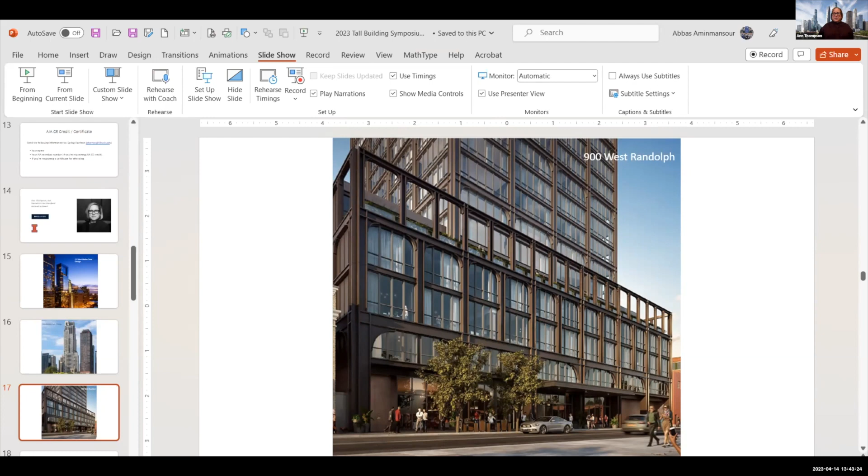Since no one is asking a question, I have a question for an experienced developer. How do you see the trend of modular housing and modular construction, the market, and the acceptance by developers? Because there has been so much technology and experience gained over the years, but it looks like modular housing still has not taken off in a big way to solve our housing problem, our homelessness problem. Everyone knows it is quick, simple, and fast, but I don't see any developers jumping onto this bandwagon.

No, we haven't. It is interesting. We have explored this a little bit, especially with our affordable housing portfolio, and we are very interested in modular housing.

At the quality level that we build, we have not found it yet to be economically feasible in most of our projects. When you're building affordable housing, there are very strict requirements in terms of the quality of construction, dimensions that we have to meet. With those codes and requirements we need to follow, we have not yet found a modular product that we can build in a way that is actually cheaper than a stick-built product. So I think that is part of it.

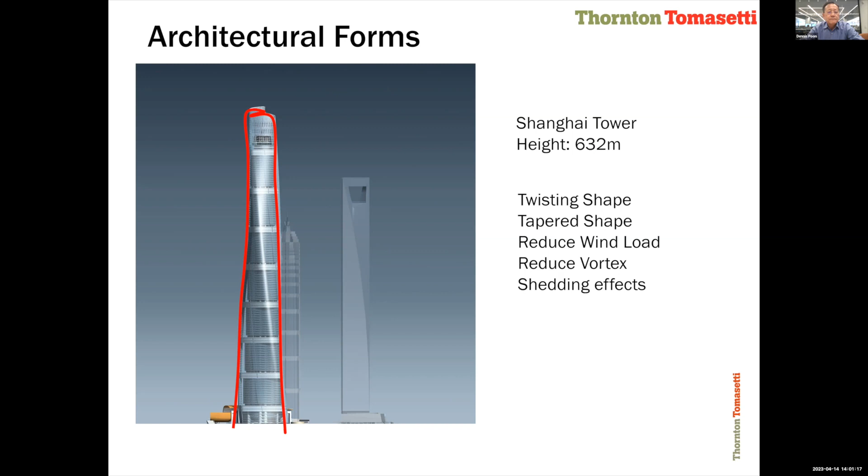We're also tapering it to reduce wind load, and creating notches on the side of the building to cut down the vortex shedding effect. So there are all kinds of engineering solutions, working with wind tunnel tests and with architects to create the best architectural forms and best engineering solutions.

Vortex shedding is one subject we all have to pay attention to when we design any low-rise or high-rise structure. Vortex shedding is a phenomenon where wind creates a spinning, turbulent flow of fluid. When you study fluid dynamics, it is an unsteady flow. When wind blows towards a building or object, it will go around the building.

When wind goes around the building and wraps around it, it creates a vortex, like a turbulence flow. This is a crosswind load. When wind goes on one side and to the other side of the building, it creates a negative and alternating low pressure zone that causes the building to move in a crosswind direction, oscillating the building.

It will create not only the drag wind effect, it will also create a crosswind effect. Now, for super tall buildings, when the building is very slender and the slenderness ratio is taller than 10 - slenderness ratio is defined as the height of the building divided by the width. If the aspect ratio is high, that means your building is very slender. The wider you are and the shorter you are, not slender. But the skinnier you are and the taller you are, it becomes slender.

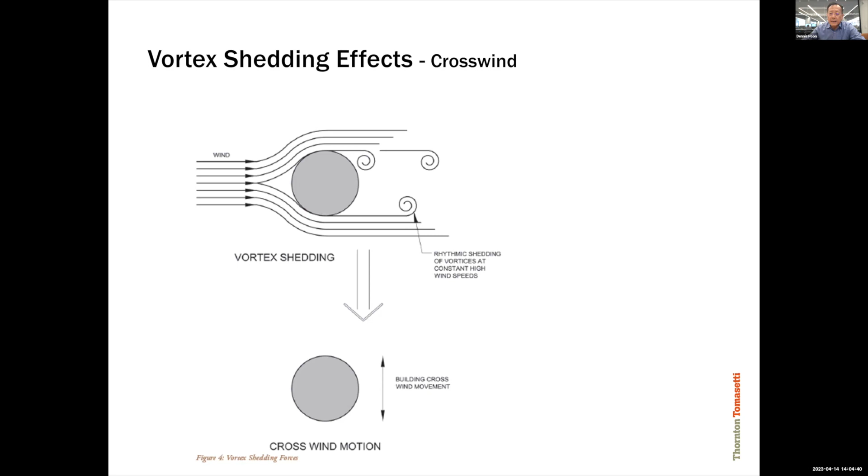So you see how the crosswind will cause the building to move in the other direction. How do we solve the problem?

When I started working on Taipei 101, we worked with C.Y. Lee architects in Taiwan and did wind tunnel tests. We did different wind tunnel tests on Taipei 101, and decided to change all corners of the building into staggered corners with recessed corners - we did corner setbacks.

On Ping An Tower, which is a 600-meter tall tower in a typhoon zone in Shenzhen, China, we also provided recessed corners in order to break up the vortex.

The reduction of wind load has a lot of benefits to your building, construction cost, and comfort level. If you reduce the wind load, you can make the tower core smaller, and therefore have smaller column sizes by reducing the wind load stress. Then if the core is smaller and the building member sizes are smaller, your building weight or mass is smaller. When your building's weight is smaller, you reduce the earthquake forces, because seismic forces are a function of the mass of the building.

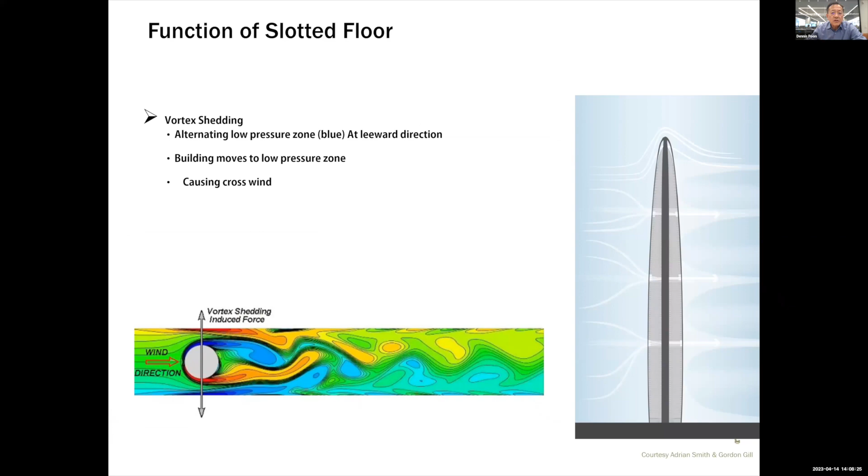So we went through a wind tunnel test with our ally, our colleague RWDI in Canada, and we ran different wind tunnel tests to find the optimum solution. This shows some of the effects, how you can see the vortex shedding and the induced vortex shedding effect. You cannot cheat.

So after that, we tried to work with the architect on how to create a wind slot and optimize the architectural form without any negative effect. So the end result is a more efficient structure, a cost-effective building, and it works.

Now, another phenomenon when we deal with high-rise buildings is the issue of acceleration. Everyone knows all buildings will deflect and move due to wind, or move in different directions. It is not the movement and the amount of deflection that people will feel. People will feel the motion, the building motion, due to high acceleration of the movement.

The large deflection of the building will have a bad effect on the building finishes - your door frames, your partition walls, your curtain wall finishes. Curtain walls will crack or pop if you have excessive deflection. And if you deflect too much, you introduce a lot of stress and strain to your building members. That's no good. However, for the occupants of any tower, the acceleration is the perception that makes you comfortable or not comfortable. People will feel the building movement if you have excessive acceleration.

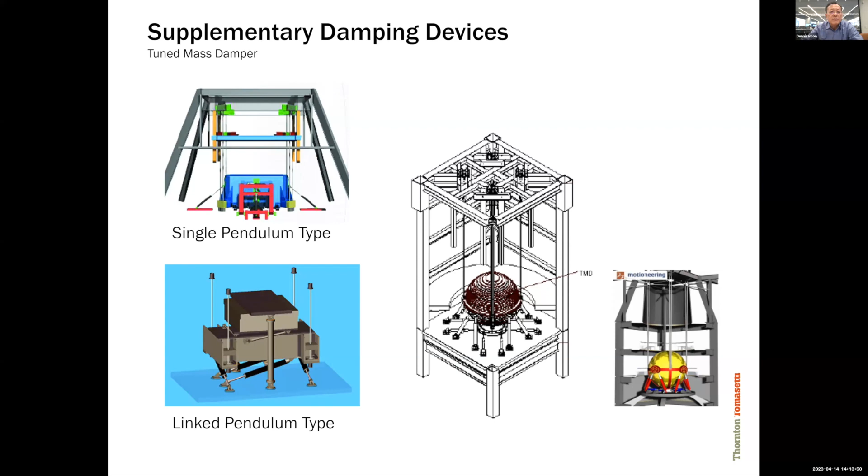This is one of the pendulums we used in Taipei 101. We created a steel ball painted gold, about 3 stories tall, and opened up the space as a sky restaurant and sky observation tower. This became a tourist attraction.

This damper did move during earthquakes and high wind, and it became an attraction. When people see it moving very slowly, they feel more comfortable because they know the engineering works in this high-rise building, and it also functions somewhat during an earthquake.

The other one is Shanghai Tower. The gray color you see at the bottom, hung by cable, is several hundred tons of steel plates, and the designer put a sculpture on top to make it like a tourist attraction at the top of the building.

So TMD is a very good device, and sometimes on residential buildings, when you don't need that much damping, we use a water tank with control hoses on it, making it like a tuned liquid column damper.

When the building sloshes, the water gets activated and sloshes around through different valves and openings, and gates inside the water tank. We control the water flow to counteract the building motion.

Another one uses viscoelastic material, which we put in a link beam between concrete shear walls. You have two concrete shear walls, usually in the elevator lobby, connected by a link beam. When the building moves, it activates this concrete link beam, so we put viscoelastic material to absorb this movement and the energy, creating a damping effect.

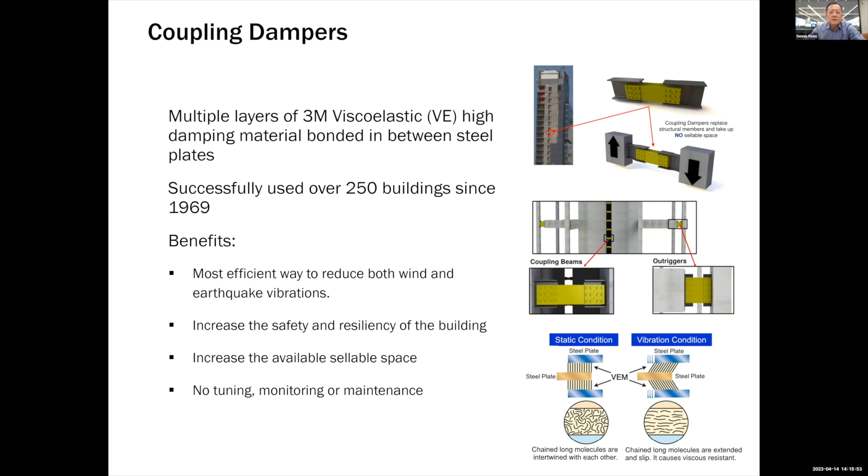The other one is like a viscous damper, working like a shock absorber. Sometimes we can put it at the end of the outrigger. When the outrigger connects to the column and moves, we can absorb some of the energy. So in addition to managing the mass, stiffness, and frequency of the building, there are supplemental dampers, which are a much cheaper way to do it.

There's another one developed in-house by Thornton Tomasetti with RWDI, called the hummingbird kinetic damper, because water sloshing dampers and water tank dampers are too heavy and use a lot of space.

We use a series of air pipes connected to a series of water tubes, using air spring control through valves to accurately control how the water moves inside the tubes. This is a very effective way to mobilize the whole volume of water inside the tube instead of sloshing dampers. We can put these tubes below the mechanical room, hung below it, or on the side of the building—it's very flexible. This is another effective way to use dampers to manage acceleration and save cost on the tower.

Now, another tool we have for high-rise buildings is our TT Core group, continuously creating software development and computational modeling, research and development. As we continue to push the envelope in engineering innovation and optimize design, we need new technology with new software development, and our TT Core Studio is continuously working on that.

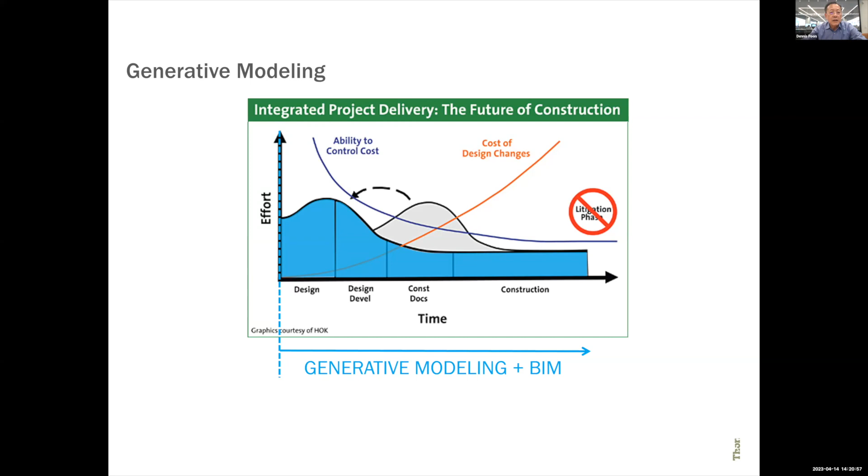So when we do parametric modeling, we have to work with the architects hand in hand. We have advanced software - everyone has been using Rhino, Grasshopper, and so on. We also have our TT in-house core studio, specific software developed that will enhance it, giving full parametric modeling.

This is a design competition from years ago in Asia, and the architecture had this kind of rendering. So if you have all this exterior curtain wall, how do we cope with that? We went through parametric modeling to see how we can provide our primary structure and adapt the primary architecture's exterior into our structure.

So through a series of parametric modeling, we optimize our structure, system, and form at the very beginning, and then give it back to the architects and work with them in order to have the optimum design from early on. Whether it's a composite structure or steel structure, it's the same - we have to work out the structural system primarily first.

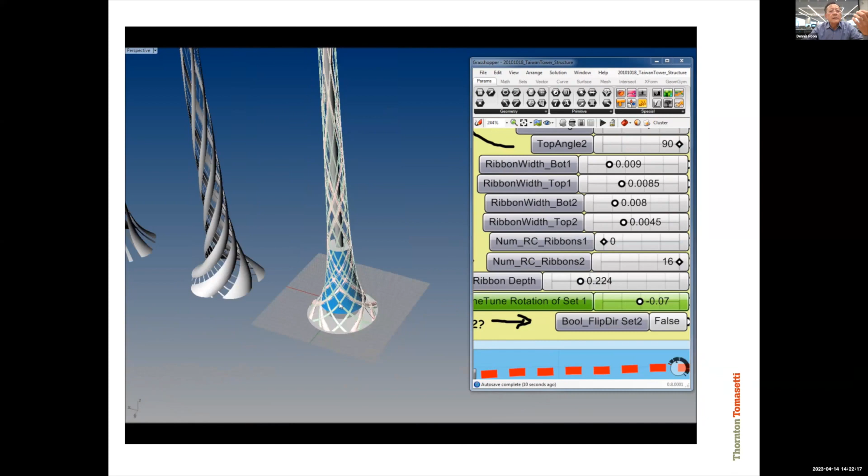So you can see the ribbon, the chaotic or random design - this will lead us, at the end, to create a very rational exterior diagonal bracing system that will fit into the architecture and hide the structure within the curtain wall of the architect. So this is one of the examples.

I have more slides on other jobs, but I know I don't have time. Another subject for our high-rise building design will be performance-based design. As we know, we are dealing with earthquakes everywhere now in most countries, especially in Asia and developed countries - they have a lot of seismic design.

So our old style of linear earthquake design, linear analysis, is no longer accurate. So we started performance-based design very early on, more than 20 years ago. We are already working on performance-based design at different levels based on the capacity and the computer software we have. So performance-based design is a must, an important subject for high-rise building design.

And that's why we have to take our advanced dynamic analysis classes. It is very important to know dynamic design and nonlinear analysis. We are using time history analysis. We have to understand what seismic level we design for, know the material we are using, and consider the deformation base - and it is always a nonlinear analysis.

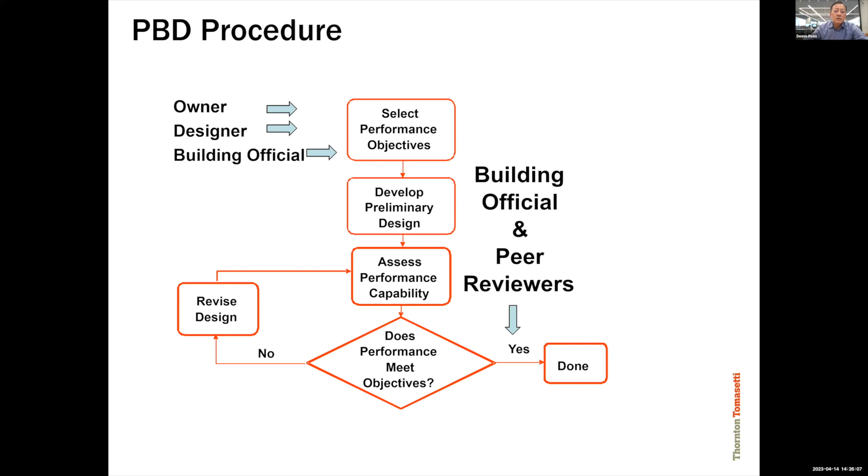So we talk to the owner about what performance target we will be using for the building, and this is a discussion with the owner based on performance target. After the owner and designer agree on the selected performance objective, we develop our design criteria and continue on this performance-based design.

We create a mathematical model for the tower structure. We do inelastic material property analysis with steel, concrete, and concrete in tension, and study that. So we have to select the proper seismic curves.

On this job, we study the different curves in San Francisco, different curves in different parts of the world, look at the time history curve and try to calibrate it in a way that is useful, and we scale it up and down to the level that can be used on our specific project site, because we have to do site-specific seismic evaluation, not just by the building code on high-rise building design. We do site-specific seismic evaluation and analysis and choose the right seismic acceleration curve, time history curve to use.

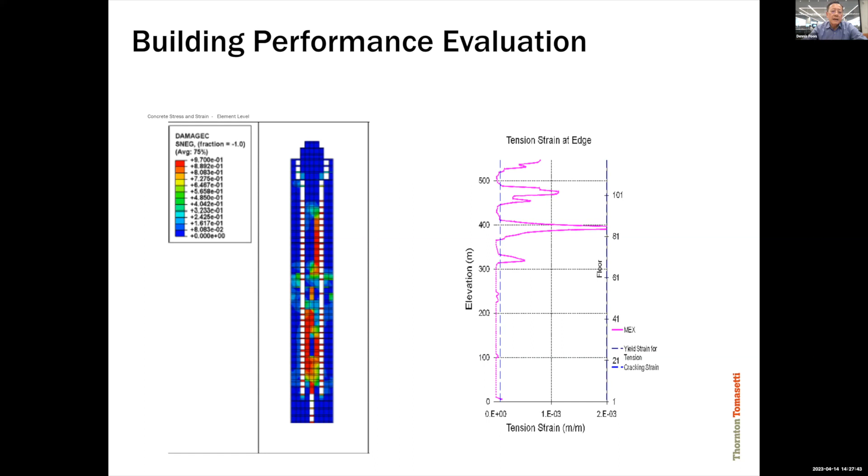So after that, we check the performance of all the beams and the shear walls. You can see the hotspots we have in our shear wall, in our link beam area, with nonlinear dynamic seismic analysis. You can identify through visualization, go to this area, and see how to improve it, how to design it properly. So it is a lot more accurate to provide performance-based design for high-rise buildings. The old days of linear analysis are long gone.

Now, another thing in our industry is 3D printing. I'm quite interested because I always look into the forthcoming trends in our industry. We cannot get away from 3D printing. 3D printing is already here, but for buildings, we can already do a lot of 3D printing with small bridges, maybe a lot of building units.

I participated with AI SpaceFactory on the MARSHA 3D printing project. We basically provided a special material to do the printing, and participated with NASA. So you all will have the opportunity to participate in upcoming opportunities for 3D printing in our industry, from small houses to mid-rise buildings, maybe even to high-rise towers in different ways.

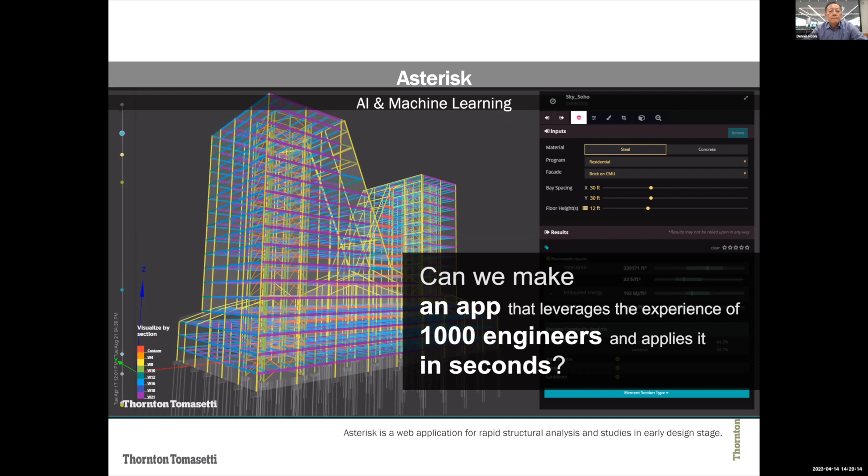So machine learning is also part of our daily lives right now. We always have to accommodate AI and machine learning. Our company has been so committed to it, and we have a lot of database in our AI that will help us advance our design and optimize our design. We have software we developed and how we work with all our clients to optimize it.

So sometimes size and talent matters, and I'm lucky with our founder Thornton Tomasetti's group, and everyone has been able to stay on the forefront of technology. I encourage all of us to stay on the forefront. That's how I have the opportunity to work with my team on so many challenging projects, because we have the tools and the experience to do it.

Now, I have 4 or 5 towers I could talk about, but I picked just one of them because time is running out: Wuhan Tower, Greenland, in Wuhan. Everyone knows Wuhan after COVID, but that is still a very controversial subject where it happens - we're not going to go into it. I was in Wuhan many times, and so far so good. I came back okay.

This landmark building in Wuhan is designed by Adrian Smith, with us as the structural engineer, working with local engineering firm ECADI. It was supposed to be 636 meters tall, but after we designed the building and construction reached almost 75% of the way up, the government said you cannot build 636 meters - you have to cut it down to about 500 meters. So we lowered the crown after that, but this building is finished. It's still close to 100 stories. This is the building where we utilized all the tools I've discussed - how to cheat the wind, how to make the building taper, how to do the wind slot and acceleration control, and all the high tech we're talking about.

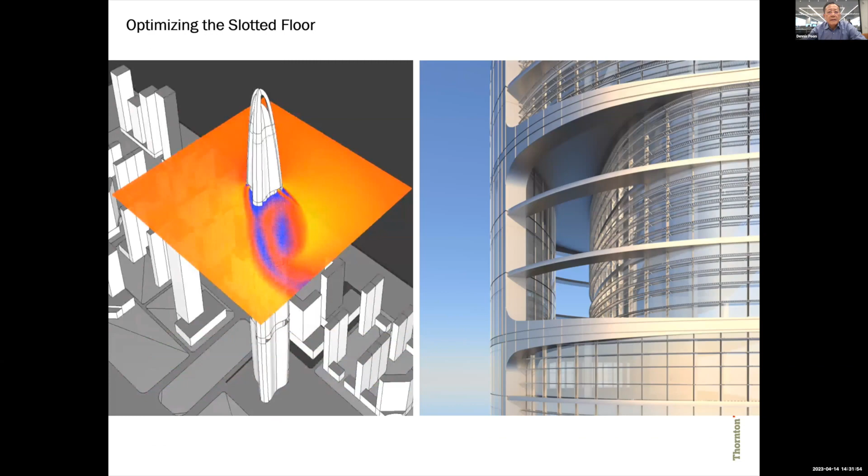Actually, we are. So anyway, I think I can just go through this very quickly, and you can see the aerodynamics, and then again, I want to show one more slide that is important for the framing.

So you see, this is the core. We try to use a composite concrete core with steel buried inside, and also provide the perimeter column. We try to use the full width of the building by using outrigger trusses, connecting the core with the outside column, increasing the stability of the building to make the high-rise stable.

So this is the composite concrete core, the perimeter super column for the tower, and this is the extensive use of outrigger trusses on the mechanical floor, the beam system.

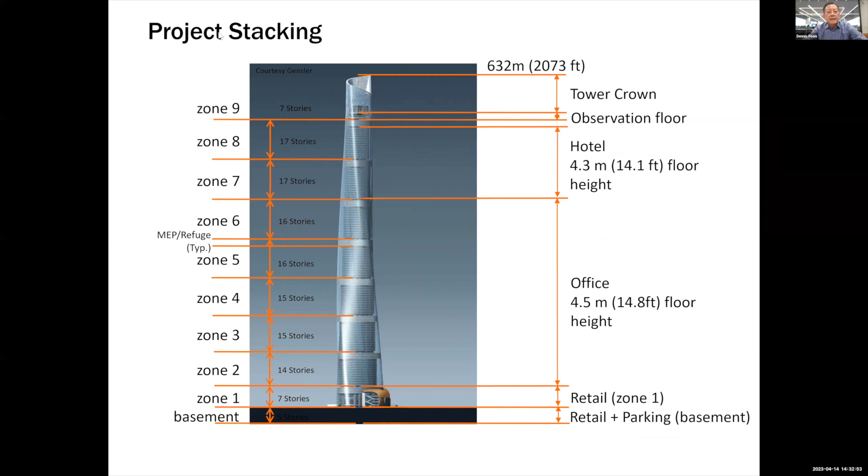So anyway, next time we can talk to you more about different buildings, Shanghai Tower, and so on. I want to conclude this way. You see, even with the shear wall, sometimes we use steel plates inside the shear wall so that we can reduce the congestion of the rebars and also take higher strength steel. This is some of the Shanghai Tower.

Since we don't have time, we will leave it for the next opportunity when we meet again. There are many interesting projects we can discuss. Hopefully I can make you guys more interested in new technology and keep exploring another new frontier. We have many good colleagues driving this, but as I said in the beginning, I really want to see how we can use our experience to push forward and build more housing for the public, not just beautiful buildings, but buildings used by the general mass, because housing is a worldwide problem with population growth. Hopefully we will pay more attention to it.

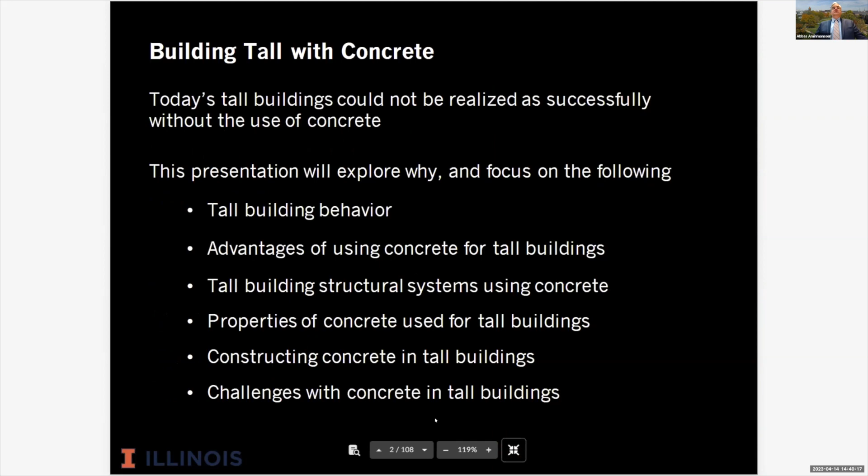So today's tall buildings really couldn't be realized as successfully without the use of concrete. We're going to explore why through tall building behavior, advantages of using concrete, tall building systems that use concrete, the properties of the concrete we use, how we construct our buildings in concrete, and then some of the challenges we see.

So first, some overview on tall buildings. Tall buildings are becoming more and more common, and so are taller tall buildings. Dennis alluded to all the slender tall buildings. CTBUH classifies super tall buildings as those greater than 300 meters and mega tall being greater than 600. And here's Dennis's mega tall building.

So one of the— oops. I don't think this is the slideshow. This is an active... No. Anyway, sorry for the technical difficulties here.

Currently we have 4 megatall buildings and 211 super talls. Under construction, there's a lot more. Proposed, there's even more. And it's fascinating to look back just a little over 20 years ago when we had no megatalls and only 26 super talls.

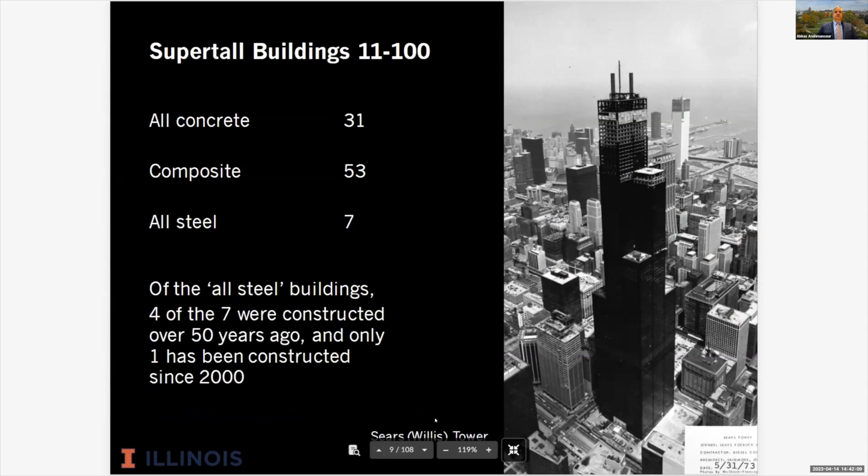Looking closer at the top 10 tallest buildings currently, 2 of the top 3 are all concrete—now they do use structural steel to create the spire, but they're essentially concrete systems. We've got 7 that are composite systems where concrete core walls are used with composite columns, and then we've got Taipei 101, which has composite as well. Looking at the rest of the 100, we see 31 all concrete, 53 composite systems, and only 7 that are all steel. And of those 7 all steel buildings, 4 were constructed 50 years ago or longer; only 1 has been constructed since 2000.

So why do so many super tall buildings use concrete? There have been continued advances in concrete material, as well as how to construct concrete in an efficient manner. Additionally, concrete has many inherent advantages that complement tall building behavior and design: it provides greater stiffness to reduce drifts, greater mass to slow down motions, enhanced strength opportunities, and the thinnest floor plate to optimize building height.

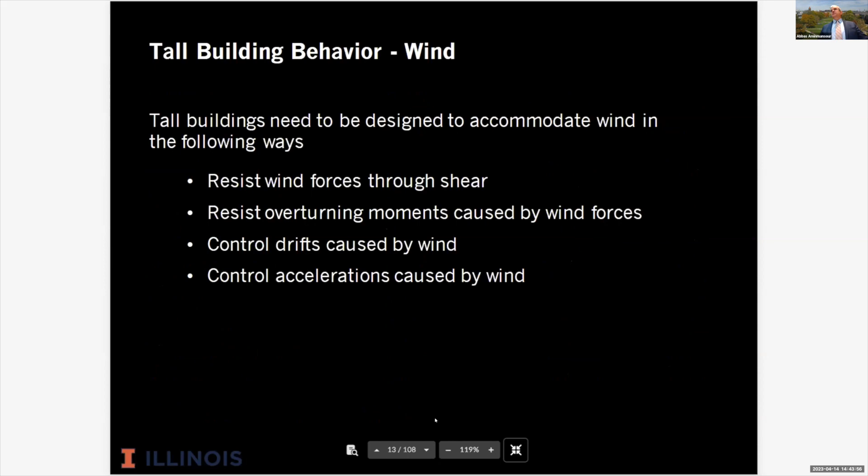Slender buildings have different responses and requirements to the wind. In tall buildings, all tall buildings need to be designed to accommodate wind, resisting wind forces through shear, resisting overturning moments caused by wind forces, controlling the drifts, the motions due to wind, and also the accelerations.

First, I want to talk about how wind hits buildings as a shear load. When we have a large concrete core, it's very efficient in resisting that shear. We can also utilize the building's perimeter to reduce shear, although most of it's still going to be taken by the concrete core.

Wind also creates an overturning moment onto buildings. So we'll have a wind load that hits a building. It gets resisted ultimately at the base, but it creates this overturning moment, and that overturning moment gets resolved into a force couple that can potentially create uplift or tension on a structure.

That overturning moment, no matter how big your structural footprint is, is the same magnitude. So increasing your structural footprint increases your moment arm, decreasing that couple. Diagrammatically, if we only have a core versus a building where we've expanded and engaged the perimeter, our moment arm, our structural footprint, is much bigger, so we can reduce the force couple.

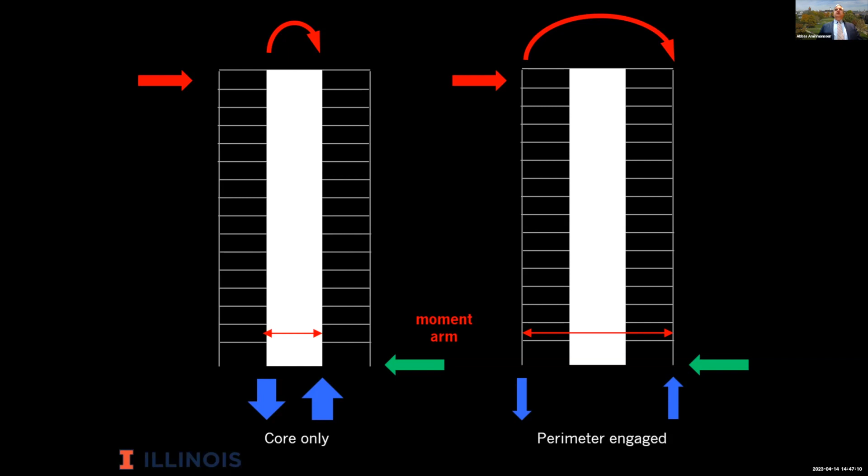Engaging the perimeter not only allows us to reduce the uplift, it also allows us to increase our building stiffness, because we're reaching out and grabbing all of that material that's as far away from the center of the building as possible. Doing this in concrete can really increase this stiffness.

Let's take a look at an example. We have a representative tall building with a central core wall system, and we calculate the building stiffness by calculating its moment of inertia. Now if we consider engaging the perimeter columns, let's say we have 3x3 concrete columns.

We can calculate the moment of inertia of those concrete columns as 240,000. That's because the important component of calculating moment of inertia, or stiffness, is the distance away from the neutral axis that material rests. So if we add the column stiffness, we wind up increasing our overall building stiffness by almost 4 times.

Now if we look at the study using steel, we went with a W14x873, which is one of the largest available steel sections. It winds up basically giving us about the same performance as the concrete column. But what happens if you combine the two together?

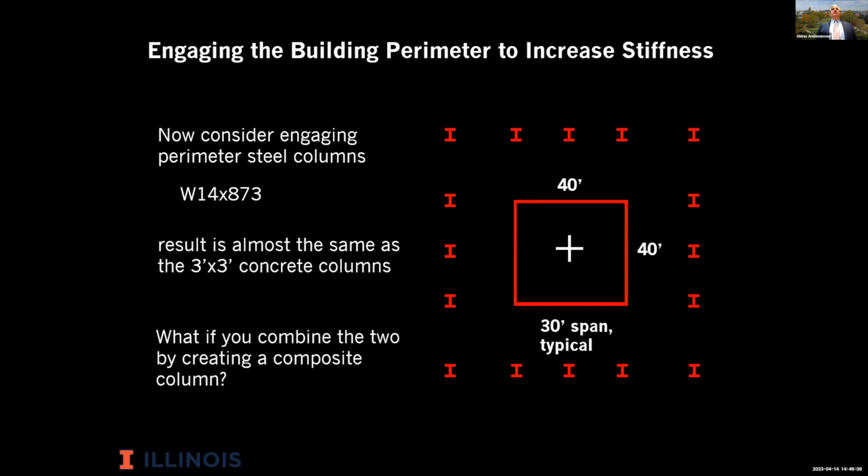You combine the two together either by a circular CFT, concrete-filled tube, or by placing a steel section within a concrete element. This winds up taking advantage of both the concrete and the steel, further increasing your stiffness. Not only does it increase your stiffness, it increases your strength as well.

This is a very common solution when you have a steel floor framing system, because now you can use the steel within the perimeter columns to connect your floor framing. The steel also helps reduce the issue of shortening in concrete, which we'll talk about a little bit later.

As Dennis started to get into accelerations, increasing your stiffness does help to control drift and accelerations, but sometimes you need more than just stiffness to control accelerations. Tall buildings, but especially the slender tall buildings we've been talking about, are susceptible to these increased accelerations.

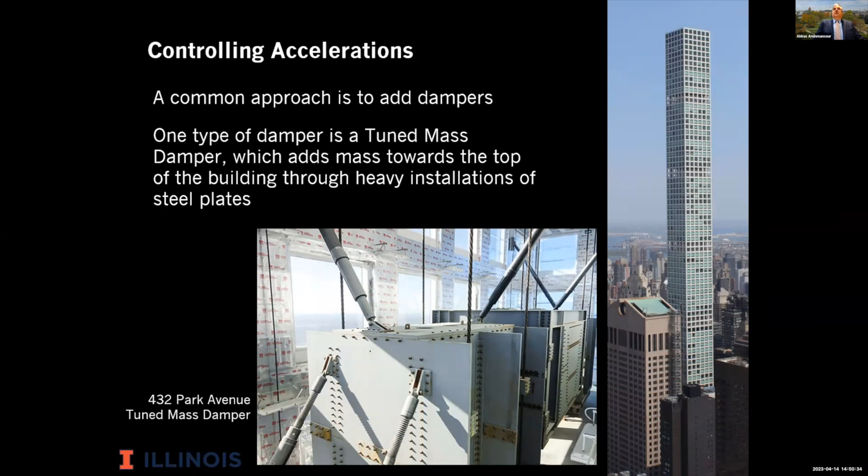One of the ways we can make buildings more comfortable from accelerations is to add mass, because mass will essentially slow down the building's motions. One way we can slow down the building's motions and add mass is to add dampers, the tuned mass dampers that Dennis was talking about for Taipei 101. Here's the one at 432 Park Avenue. Now, this is a very slender building.

Another approach to adding mass is to start with a concrete system, because concrete's weight automatically adds mass to the building. Now, this isn't just saying add more concrete, we still want to make an efficient concrete design, but just using concrete by itself adds more mass. This is beneficial, though it might not be enough, as seen again at 432 Park Avenue, a concrete system that still needs some supplemental damping, but at least it's an assistance.

Building tall also requires a lot of resources, both materials and economic resources. So optimizing a building's height can really help to optimize the building's performance from a material and financial standpoint, because less height means less resources used for the same area. And considering the same area, less height means less wind loading.

Concrete can provide the thinnest floor system. If we look at a typical ceiling sandwich, and this happens to be one with a steel frame system, we see that the ceiling sandwich is dominated by the structure. And since this is a frame structure, it takes up a greater percentage. So if we can optimize the structural portion of this, we can then optimize a building's height.

Considering concrete, a concrete flat plate system is the thinnest system you can build for tall buildings. This is a continuous thickness flat slab that can efficiently span up to 30 feet. We can get more if we post-tension it. Frame systems you can span longer, but now you have the additional depth like we saw in the ceiling sandwich. So this isn't an option for all tall buildings, but it is an option to consider for multiple usages. It's not just for residential and hotel — we can do office with this as well.

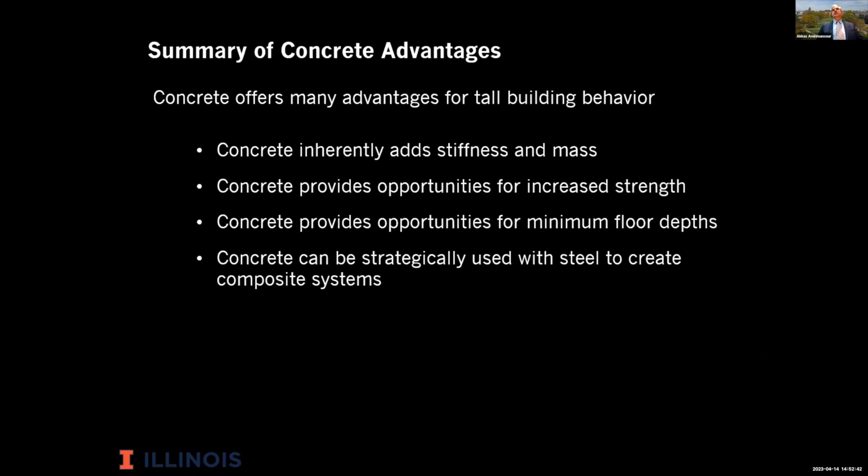So in summary, concrete offers many advantages for tall building behavior because it inherently adds stiffness and mass. It provides opportunities for increased strength, opportunities for minimum floor depth, and the concrete can be strategically used with steel to create composite systems.

But there are other advantages. Concrete slabs have acoustic properties that make concrete floor systems a preferred choice for residential and hotel applications. It also has inherent fire resistance characteristics. And concrete construction can also be fast, especially if it's tuned to the needs of the formwork systems and the construction sequence requirements.

I just wanted to go through the lateral systems which take advantage of concrete. First is a core only, where the lateral system is only the core — all the shear, all the overturning moment, all the stiffness is derived from that core. Now there are some limitations here because that core can only be so wide, so your footprint's only so wide.

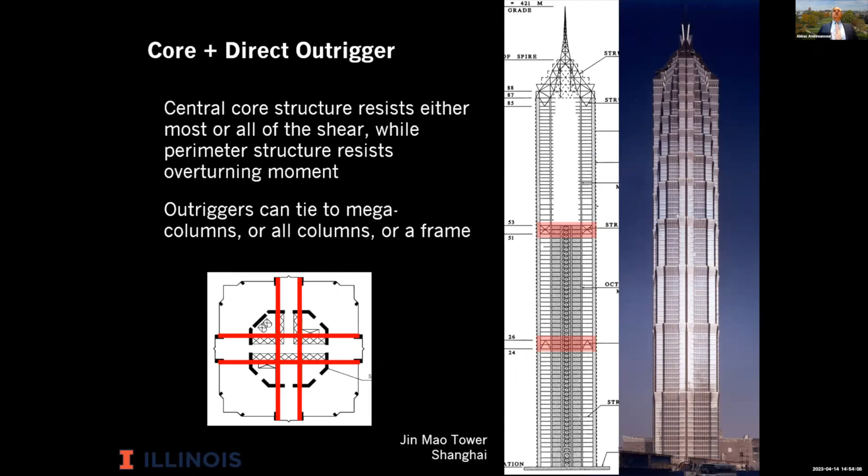So because that's limiting just to have the core, the next step is to engage the perimeter. We do this first with a direct outrigger, where we have walls or trusses that rigidly tie the core to the perimeter. It increases our building stiffness because now we've engaged the perimeter, and it also reduces our uplift. The central core in an outrigger scheme really still resists most or all of the shear, while that perimeter structure assists in resisting the overturning. These outriggers can connect to a mega column like we see here at Jin Mao, or they can connect to all the columns, or they can connect to a building frame.

An example of a system where all of the columns are individually tied with a direct outrigger is Burj Khalifa. Burj Khalifa is also a buttress core system, as we'll discuss in a minute, but it's also a direct outrigger system. You can see here on the outrigger floor, we provided double story height walls to rigidly tie every column to the interior core wall system.

So you can still get the same effects with an outrigger system by using what we call an indirect or virtual outrigger instead of a direct tie. The way these systems work is you have a belt wall that engages all of the perimeter columns and a thick concrete slab on the top and bottom of the belt wall. So you're creating a shear box — you don't actually have any internal rigid ties. This is similar to an outrigger in that you're really resisting the motion of the building and you're engaging the perimeter. It's not as effective as a direct outrigger, but it can be very effective.

In fact, one of the buildings I led the efforts on in Moscow — this was Europe's tallest building when it opened, a 10-to-1 slenderness ratio — was Oko Tower, all residential. We have four belt wall zones on this building to create the indirect outrigger.

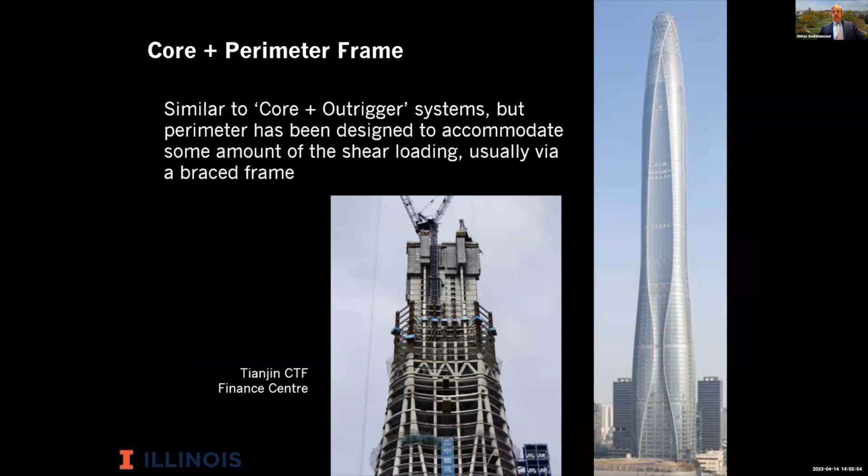With core and outrigger systems, you can also connect to a frame, such as what's shown here in Tianjin CTF Finance Center. This perimeter frame is designed to accommodate a certain percentage of the lateral loads through shear and also overturning, so it's designed in conjunction with that concrete core. Here with CTF, we used

concrete filled tube columns as well. Then we have a buttress core. The buttress core was developed for Burj Khalifa. It's a system that uses geometry to provide stability. We have 3 wings protruding from a central core, and it's inherently stable because each wing is always buttressed by the other 2. It also uses load to create stability because of the significant tapers - as the building approaches the ground, it keeps getting wider and wider in its structural footprint.

The last system I want to highlight is what I'm calling a core plus a cantilever. This is the same idea as a core-only building, except now we've expanded the footprint of the core to provide all the necessary stiffness we need for a building. The core carries all the gravity loads because we cantilever all of the floor plates off of the core. So now we've got a really efficient system in terms of resisting lateral loads and the overturning moment, because now we have all the gravity loads to resist that uplift.

A good example of this is the SOM design for Kingdom Tower that I worked on for quite a while. Kingdom Tower has that Thornton Tomasetti design that's somewhat similar, in that a lot of the floors are cantilevered off of the floor plates or off of the walls.

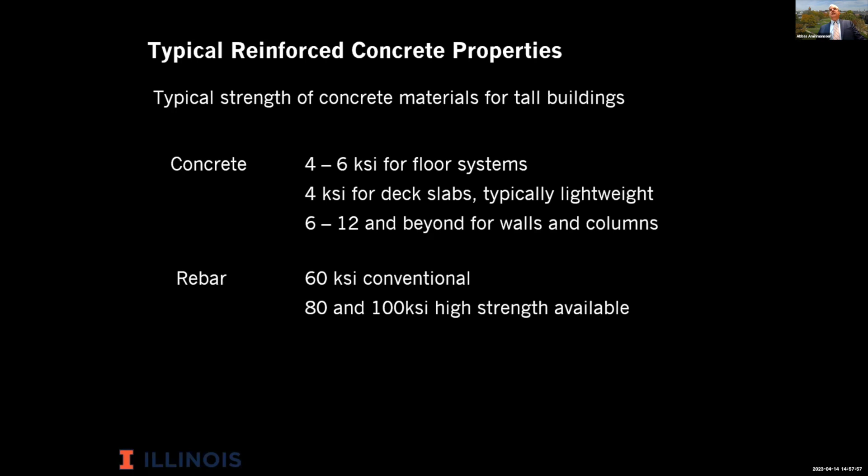So let's talk about the concrete we use for tall buildings. We use conventional concrete typically for the floor systems, high performance concrete typically for the superstructure, and self-consolidating concrete for the foundations and any congested elements. Typical strengths for floor systems are in the 4 to 6 KSI range. High performance starts at 6 and goes to 12 and beyond for the superstructure. For rebar, we use conventional 60 KSI - 80 KSI is very common - and 100 is available in certain situations as well.

Talking a little more about the concrete - typical concrete is a mixture of aggregate, sand, cement, admixtures, and water. One important metric to consider is the water-to-cement ratio. It can be as high as 0.5 for conventional concrete and as low as 0.3 for high performance concrete, because one of the ways of making concrete higher performance and higher strength is reducing that water.

Cement by itself, Portland cement, is an important part of concrete, but it's also one where replacing a portion of the cement can be very beneficial, because Portland cement by itself takes a lot of energy to produce. So it's beneficial to replace some of it with something that isn't so carbon intensive. Plus, Portland cement generates a lot of heat as it cures.

For high performance concrete, it's typical to have up to 50% replacement cements. When we use mass concrete - really thick concrete that can heat up even more - it's common to use up to 80%. Some common cement replacements are fly ash, ground granulated blast furnace slag, and silica fume. These are all byproducts of the coal and steel industry, but they all provide advantageous properties to the mix - they slow down the hydration reaction so the concrete doesn't heat up as much, they increase the flowability of the mix, and they also increase the uniform density of the mix.

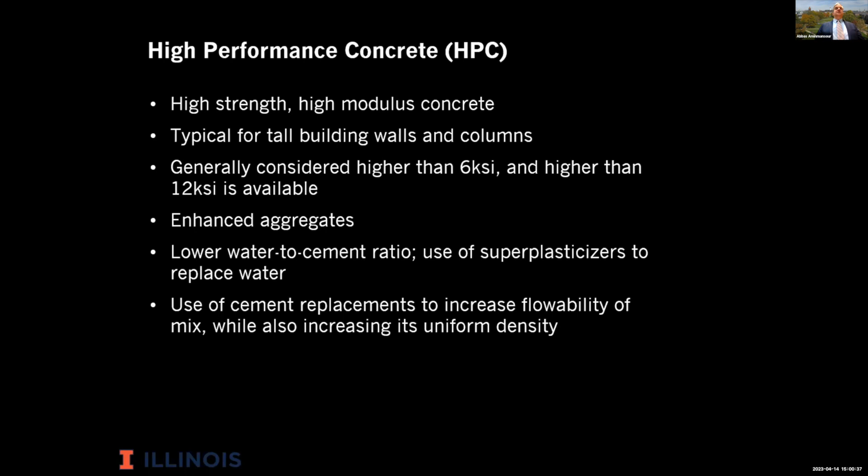For high performance concrete in tall building projects, it's common to not only specify a minimum strength like you do for all building projects, but a modulus that needs to be met as well. Additionally, there are other properties to understand: what are the creep and shrinkage characteristics? Is it a flowable mix because it needs to be pumped? How hot does it get, because the concrete elements are all generally large? And what is the durability or the finish?

I wanted to walk through an example of a project that uses high performance concrete. This is Merdeka 118, which will be the second tallest building in the world when it opens this year. It's just shy of 700 meters tall, mixed use, designed by Fender Katsalidis, Arup, and Samsung. This image shows where it stands next to number 1 and number 3, once it becomes number 2. It's a concrete system using a concrete core wall with 8 concrete mega columns, but it's also composite in that there's structural steel outrigger and belt trusses that engage these mega columns.

It does have a high strength, high modulus concrete. There's a rigorous testing program that Samsung went through with Arup to ensure the right concrete was used, meaning the right performance they were targeting. In fact, to ensure consistency in all their concrete, Samsung actually reserved a large part of the quarry where all the aggregates were coming from, to make sure they're always getting the same aggregates.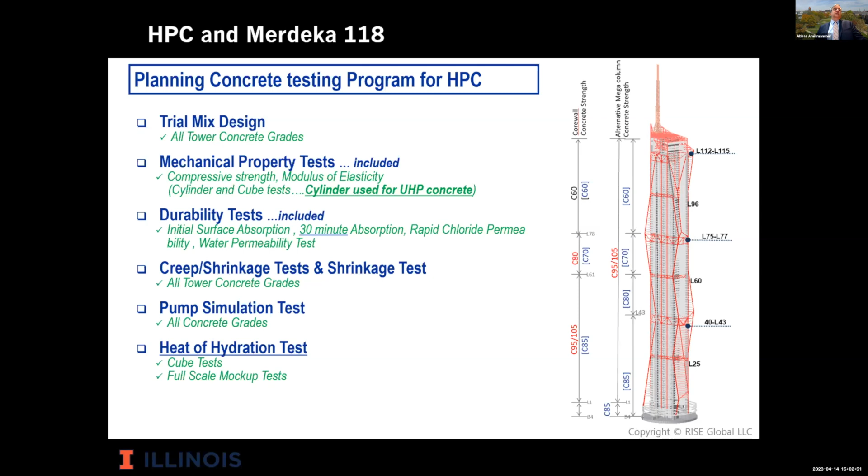The tests you go through on a building like this to ensure you have the right concrete performance: you do your trial mix designs to arrive at what the mix design should be, then tests to confirm your strength and modulus for that concrete. You do durability tests, and it's important to do creep and shrinkage tests so you understand those properties and can calculate how much the building's going to shorten. And you look at if it's pumpable, and how hot the mix gets.

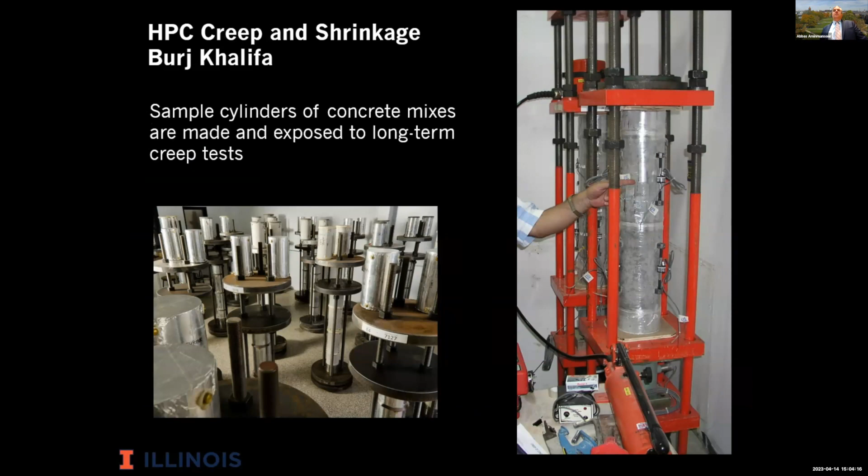They also did a large-scale test cube to evaluate the heat of concrete, particularly for the foundation mix. Then there was a number of creep and shrinkage tests done, where you develop cylinders of various different concrete mixes and put them through testing—this is a creep test shown on the screen—so you can evaluate the performance of that mix from a creep standpoint.

In terms of constructing concrete, one key metric is to minimize tower crane time, because the more you minimize use of the crane, the more that crane can be used for other things besides constructing the concrete. So you'll use formwork systems that don't need the crane, pump all the concrete to its point of delivery instead of using buckets, and prefabricate rebar as much as you can on the ground, because that's really the only thing the crane is used for in an optimized system. In other words, you design the structure to facilitate construction.

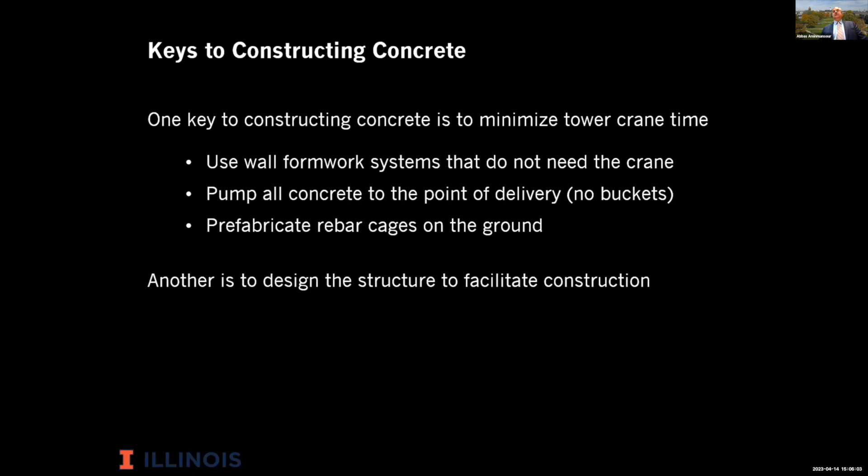You understand the requirements and limitations of the formwork systems, design and detail the reinforcement considering congestion and installation of those elements, and then design your system considering construction sequence.

When you're erecting a concrete tall building with a core, you can do it in two ways. You can do floor by floor, what's called stick built, or you can build it where the core advances beyond the floor by 10 to 15 stories. There's pros and cons to each. Most tall buildings are done with the core ahead, which enables a faster construction schedule. However, it does create some more complex detailing at the floor to core wall connection.

Now, if you have a steel floor framing system and you're advancing the core ahead, then you'll have either embedded plates within the core, or you'll have post-fixed plates that you tie that steel construction into.

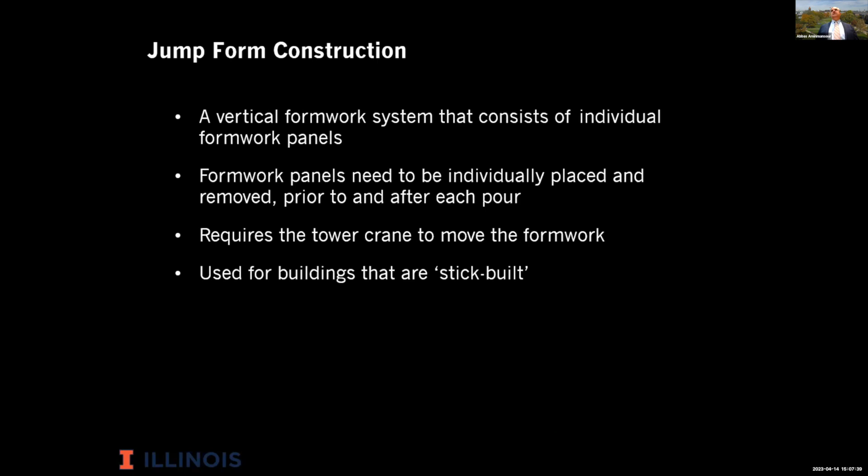Then you have slip form. Slip form is a vertical formwork where concrete is poured continuously into a continuously moving formwork. As the concrete is poured, the formwork is raised vertically at a speed that allows the concrete to harden before it is free from the formwork at the bottom. This can be a fast erection method. It doesn't need a crane, but it's not very flexible in terms of geometry because it's continuously moving.

A common system for tall buildings is the automatic self-climbing formwork system, because this really combines elements of jump forming and slip forming. Jump forming gives you the ability to modify on a floor by floor basis to some extent. Slip forming uses what you've just constructed to raise the formwork system without the use of a crane. Automatic self-climbing formwork allows you to do both—pouring on a floor by floor basis, but the formwork system is supported by the floor it just placed. A diagram here shows how this works.

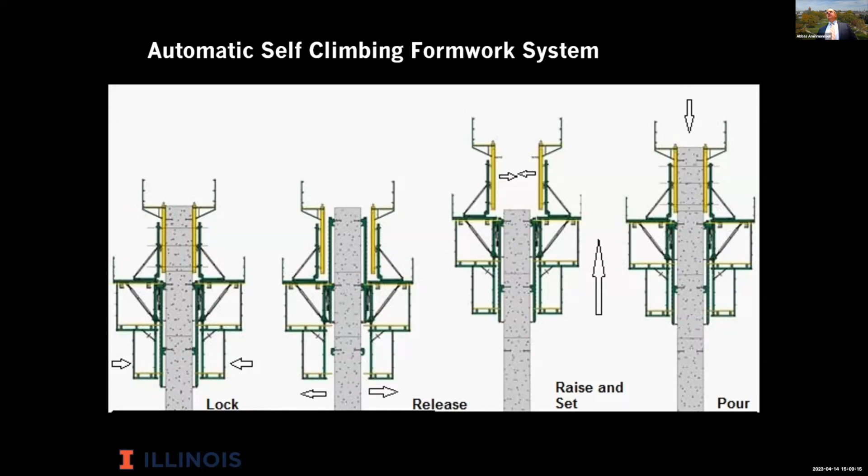You have a few different levels to the formwork system. At the top, you're placing the rebar and getting ready to pour the concrete, and then you have the floor immediately below it that the formwork system is actually connected to, and then it jacks itself up to the next floor. This is what was used on Burj Khalifa.

It really helped facilitate the construction, especially since most of the vertical elements on Burj were vertical walls. This is how the system is connected to the wall system. You've got a series of brackets that connect to the concrete that has just been placed, and the rails go through these brackets and connect to the formwork system and to the platforms around it for the workers. Through these brackets and rails, it can jack itself to the next level. Again, no crane time—that's the important key.

Column formwork tends to be modular systems where you use the same form many times for many column sizes. These need to be moved around by the crane unless you tie your columns into the wall system like we did at Burj. That being said, there were some columns at Burj that weren't part of the wall system, and these were just individual forms that went from floor to floor.

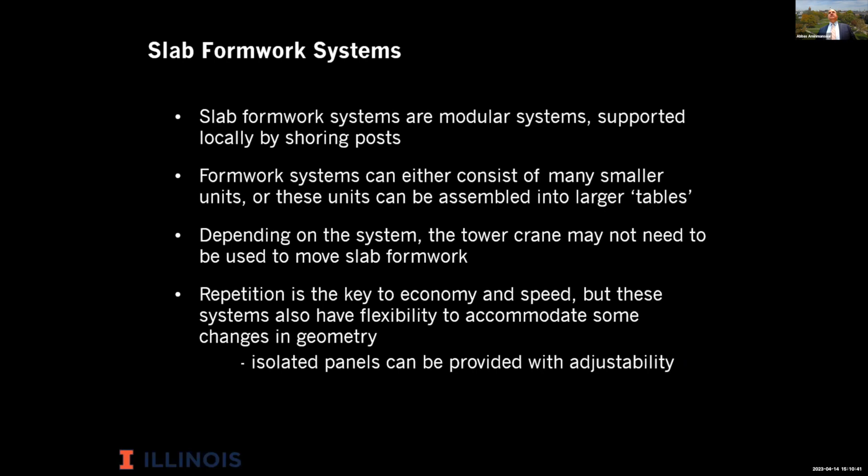One thing we need to consider with concrete floor systems is how do we shore these floors. They'll need to be shored until the concrete reaches an appropriate strength so you can release those forms. Typically when shoring these floors, you're going to go 2 to 3 stories below the floor you're pouring because you don't want to overstress the floor immediately below. You're trying to spread out the load as much as you can.

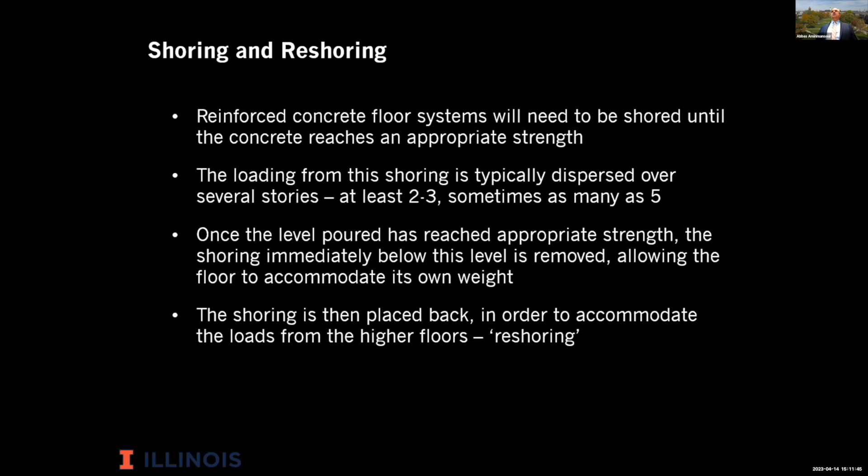And this is an example of the shoring that's typically done under a concrete system.

I just wanted to walk through how all this works with a building like Burj Khalifa. All of the vertical concrete, the wall concrete, was built with an automatic self-climbing formwork system. You've got the individual columns that are modular forms. What you can't see behind the protection for the workers are the slab forms, individual modular panels being used. And then you can see the shoring in place underneath those floors being constructed.

But no matter what formwork system you select, the concrete still needs to be provided. Typically you're not going to bucket, you're going to use a pumping system because of the speed of it. So how this works is you have concrete trucks that come to the site and deposit the concrete into a large series of pumps, and from these big pumps it's delivered to a concrete boom at the point of deposit.

One challenge with concrete is that if you have a high performance concrete that's a lot higher strength than your floor, you can't compromise the integrity of the column or the vertical concrete. So you will potentially bucket a higher strength concrete in and puddle it around the columns.

It's important if you're going to use these concrete delivery systems that you're able to pump it in one stage to the point of delivery. Burj had the world record at 606 meters for a single stage pump. That now has been surpassed by Merdeka.

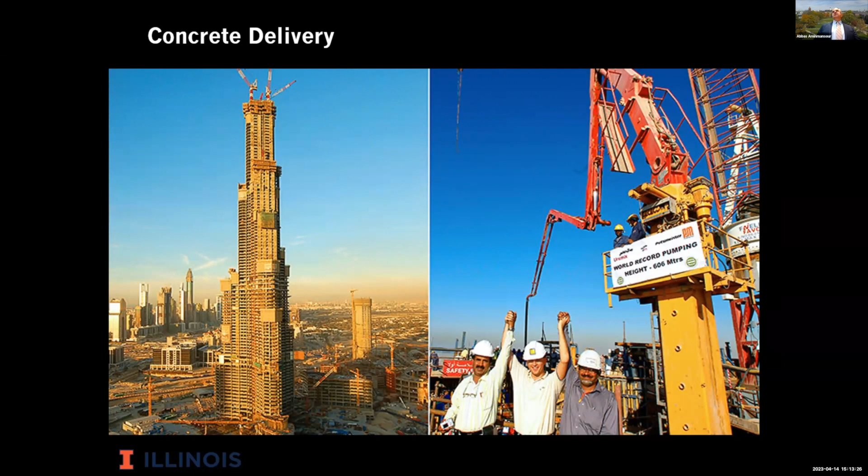Finally, I just want to quickly go through some of the challenges with concrete, particularly how we coordinate our building services and how we accommodate creep and shrinkage, and how do we actually correct our buildings during construction for dimensions.

In terms of coordination, concrete core walls are typically very thick elements and they're dense. You're not going to be able to core drill your penetration, so you really need to be able to coordinate all of the distribution and the penetrations in advance. Oftentimes, a lot of this needs to go through the door openings, which are the link beams.

This is an image of what not to do—there's just too many penetrations in the link beam. A better approach is to provide some penetrations, but also provide a zone underneath the structure to allow all the services to traverse.

But it's not only the link beams, we have to look at the walls too. When we look at going through the walls, we have to ask, are there other chases behind the walls that we need to avoid? So in some respects, it starts to become a Swiss watch.

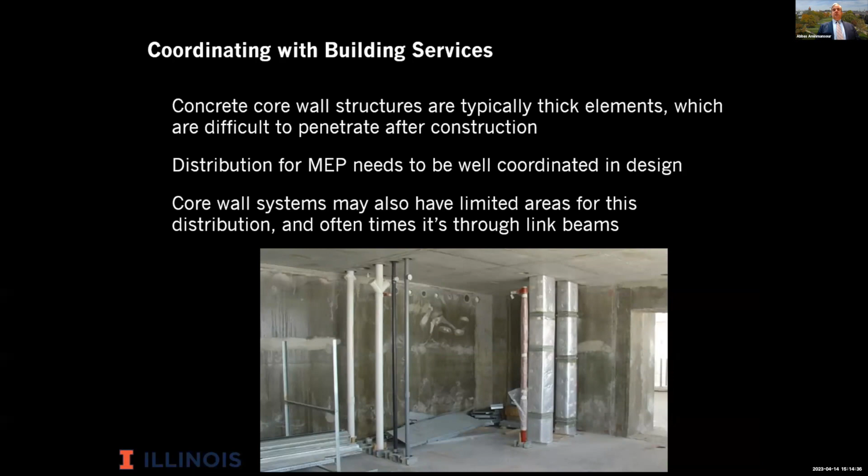Next is creep and shrinkage. As concrete ages, it continues to change its dimension, and this can add up over a period of time to a significant number. The shortening can get up to, like at Burj Khalifa, about 4 millimeters per floor. When you add that up, that's about 600 millimeters over the life of the building that Burj is going to shorten. That's something we need to consider—how is that going to be accommodated? And when I say the shortening, it's because of creep and shrinkage.

Creep is the nature of concrete shortening or compressing as it experiences sustained loading, so this is related to stress—the more stress you have, the more creep you're going to have. Shrinkage is about the shortening and changing of dimension due to concrete as it's drying and curing, so this is related to the volume to surface ratio—the more surface you have, the more shrinkage you get.

This is really an issue when you're comparing columns to walls, because you have completely different properties. Columns have higher stress than walls, and columns have different volume to surface ratios than walls. So you potentially have a difference between the two. There are a few solutions—you can try to design the columns and walls for similar stress.

That's tough to do because you just need a lot of area in your columns. One of the solutions is to make them more wall-like, like what we've done on Burj Khalifa. That also helps to keep the volume to surface ratio similar.

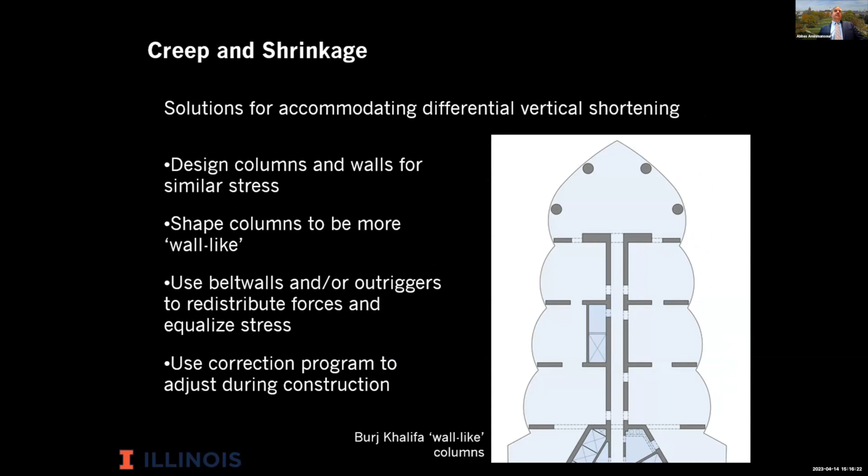But you can also use belt walls or outriggers to basically re-equalize the loads every time you encounter an outrigger or belt wall. You can also use a correction program to adjust the concrete dimensions during construction. And that's why I want to close with it, just talking about a correction program, because anytime you have a tall concrete building of sufficient height, you'll need to have a correction program during construction that corrects for height and also the planned location.

Because if you build a tall building to the theoretical wall floor to floor heights on a drawing, you will wind up with a shorter building at the end. So one approach is to design or construct each floor to the theoretical elevation, which means you're going to be overpouring your floor heights, or you actually build the floors up even more than theoretical elevation, assuming that you're going to have shortening that then basically self-corrects itself.

In order to really understand this, you'll need to do a creep and shrinkage analysis of the structure to understand the magnitude of what type of correction you need to perform. This creep and shrinkage analysis also considers the sequence of construction. And what we wind up getting is an understanding of what our wall shortening is going to be, what our column shortening is going to be, and then the really important metric, what the difference between the two are. With that information, we can put together a correction program that then the contractor can use.

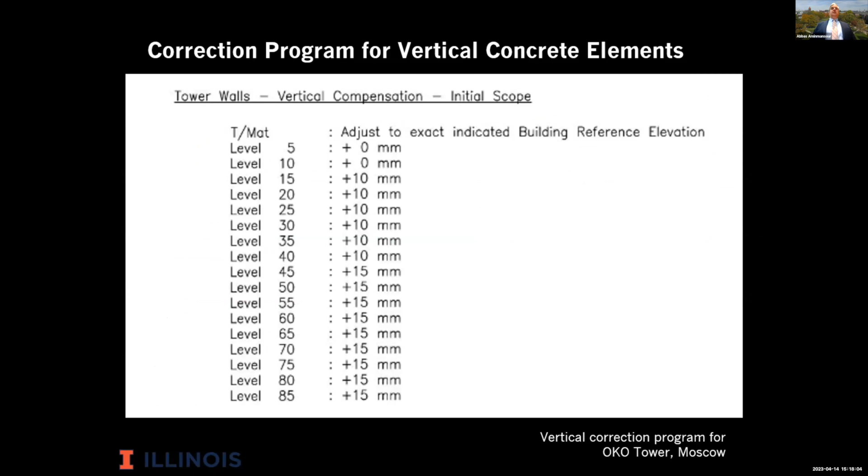Just to highlight one area of it, this is the wall correction. This is that OKO Tower in Moscow. We came up with a correction program where we overbuilt the floors, the higher that we got in the tower, so that ultimately the tower would be at the theoretical elevation once the shortening was considered.

So went through a lot of material. Thanks for your attention. Concrete, it's a great tall building material, but there's a lot that needs to be considered. A lot of advantages, but there's a lot that needs to be considered. So I guess with that.

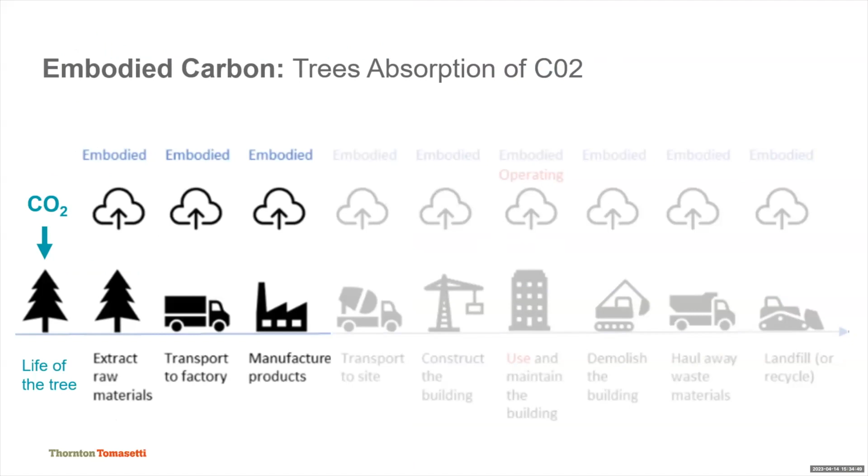I won't spend too much time on this, but there's this idea of embodied carbon and the life of the tree, where it's absorbing CO2 from our days in elementary to middle school science, and then the extraction, transportation, and manufacturing of this product.

A question I get a lot is whether it could really be sustainable or environmentally friendly if you're cutting down trees to do this. A couple things I've learned: as a frame of reference, it will only take 25 minutes to regrow the volume of wood used on Ascent, which is currently the world's tallest timber building.

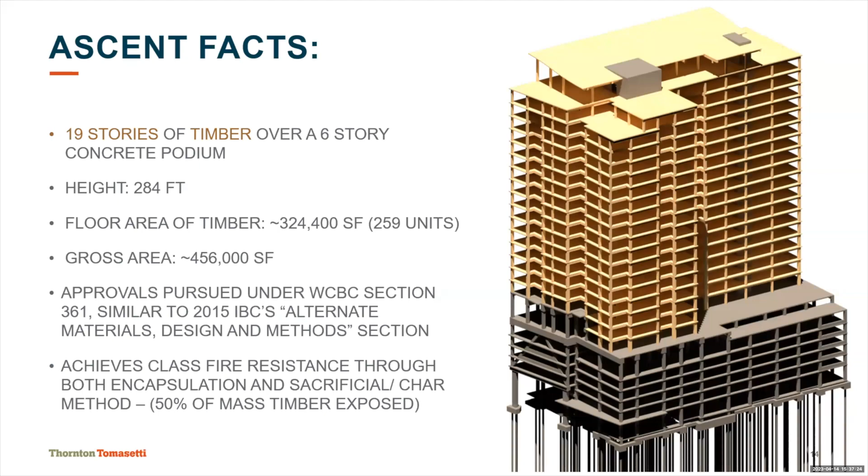It was approved under the Wisconsin Commercial Building Code, which uses 2015 IBC. That's the design code utilized. To get it permitted—I'll get into this later—a typical mass timber building in the US is normally limited to 75 feet, so we had to go through an alternate materials, design and methods in the code to get a variance. When the project was complete, roughly 50% of the mass timber is exposed, and it's protected from fire through what's called the sacrificial char method, which I'll also get into shortly.

Typical floor plates: at the bottom you have your PT parking levels.

In the middle, you have your primary residence levels for the main 18 of the 19 floors. And then at the roof, there's an amenity level. I'll show you some pretty cool photos of these at the end.

Structural system itself, at the base, as you would imagine for any high rise, typically there's deep foundations. For this one, we have concrete filled steel pipe piles. That's fairly common in Wisconsin.

One of the things we did on this, and it's probably fairly common for projects as well, is we static load tested the piles. For orders of magnitude, when we're talking about using efficiency of materials, by load testing, we actually were able to nearly double the capacity of the piles versus what you would do in a standard code application. So same material strength, same size, just by testing it, we're able to verify nearly twice the capacity.

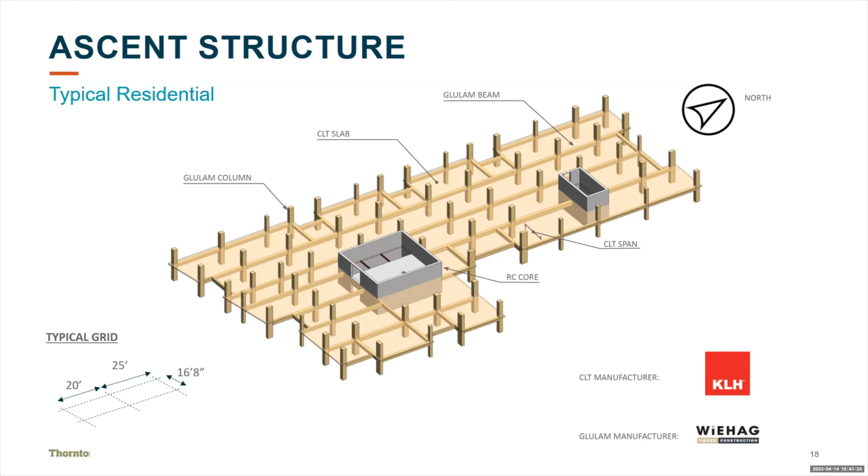In terms of the connections, there are many different connections throughout the project, but really two general beam to column connections that we utilized.

When the structure was exposed in the end condition, we used what we call this framework connector—I'll get into why we use the word framework, that's actually a different project that was permitted in Portland, Oregon. What we did is this beam or haunch actually gets fabricated in the shop, then it comes to site, and there's a notch in the beam with a plug at the base that protects it for fire.

Here is an isometric showing the parts and pieces of the structure. At the bottom, you have the podium, the concrete podium with the shear walls running up through the top. Then you have your glulam beams and columns, and then you have your CLT floor plates throughout the height.

I'll see if this plays—let's give it a shot. You can see some of the parts and pieces coming together here. It's a quick isometric—really, to some extent, if people compare it to Lincoln Logs, it truly is with these parts and pieces. I'll show you some photos later of how the team in the field actually erects the different parts and how very simply they come together.

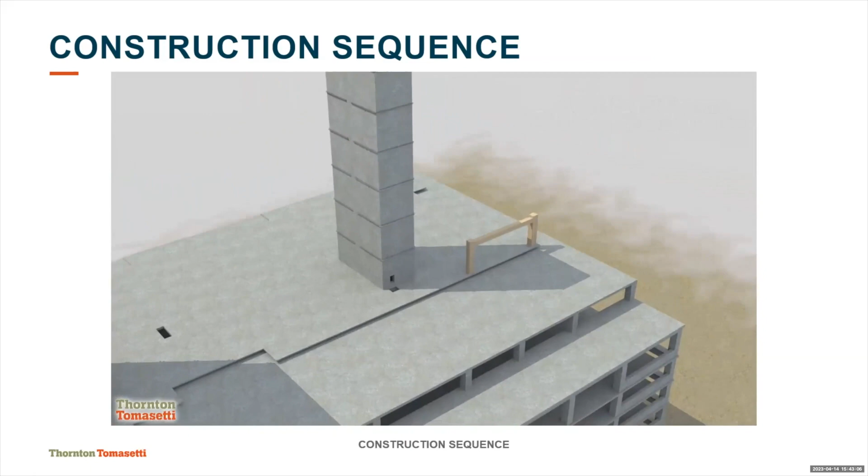Here we're up through the podium. You can see half-toned in there the transfers we talked about, with the beams and columns being set. The team on site said, if I remember correctly, that they had to be setting a beam or a column every 7 minutes or they would get behind schedule—it gives you an idea of how quickly they put these parts and pieces together. By the end, I think they were doing one floor a week, roughly, maybe a little better. But by the time they figured out logistics, it was roughly one floor a week.

Things to consider when talking about mass timber in general: versus steel or concrete, you're probably going to want to expose the material, and each species of tree has very different structural properties. So it's very important from an architectural standpoint to talk with the architect about what species they'd like to use—do they like a spruce that's more white, a Douglas fir that's more red, or a yellow southern pine? They all have a different look, and depending on which one you want, they have significantly different structural properties that we need to take into consideration.

Also, for Ascent, we actually ended up getting all of our wood from Austria. One of the other challenges that brings is that you're using a different code in the United States—all of the wood we got was to Eurocode norms, European standards. So we had to develop a process to verify the European grades in North America. Essentially this meant we had to do three designs: an NDS design, the National Design Specification; a Eurocode design for the species in their own native code; and a hybrid design where we used engineering judgment to take the parameters from Europe and bring them into what they would be in North America.

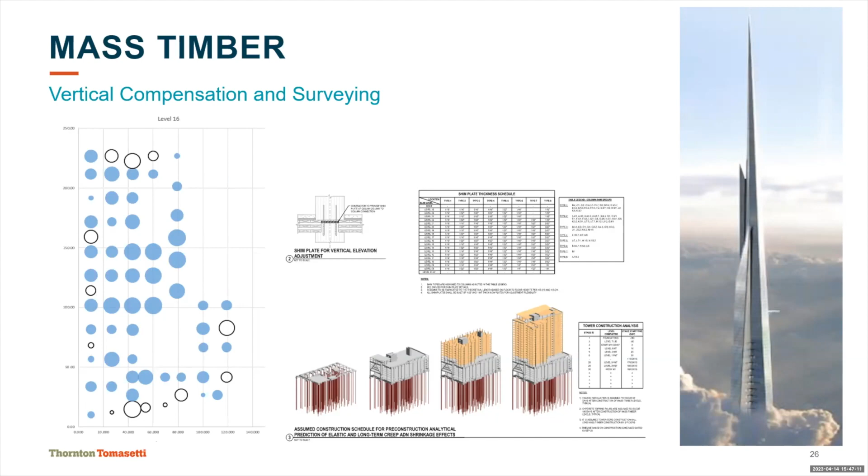And then, as Jim mentioned, we also overcompensated for some of the columns with the understanding that over time it would actually come down and shrink a bit.

One of the key things we've also talked about is coordination among other trades with mass timber. There's a lot of stuff going into a small box.

Because we got ours on Ascent from Europe, it had to be coordinated ahead of time such that we couldn't go to the local Home Depot or Lowe's to get a new timber panel if it wasn't correct. So everything had to be coordinated over almost 100 coordination sessions with mechanical, electrical, plumbing engineers, the contractor, the structural engineer, and the architect, to make sure every screw was modeled in 3D ahead of time.

So one, there were no clashes with other screws. You can see a beam and column connection where things get a little tight, but also every one of these cores and penetrations through the slab actually came from overseas. So they had to be coordinated far ahead of time so that in the field, every penetration was in the right location, because we can't get a new panel.

If we had to wait for another panel to be shipped, you would lose months and months of schedule on the project. And sometimes you'd be surprised—I'm 15 minutes into the presentation and haven't talked about fire yet, which is incredibly critical for mass timber construction. I'll get into that a bit more when we talk about the permit process, but this is the idea of fire performance for mass timber.

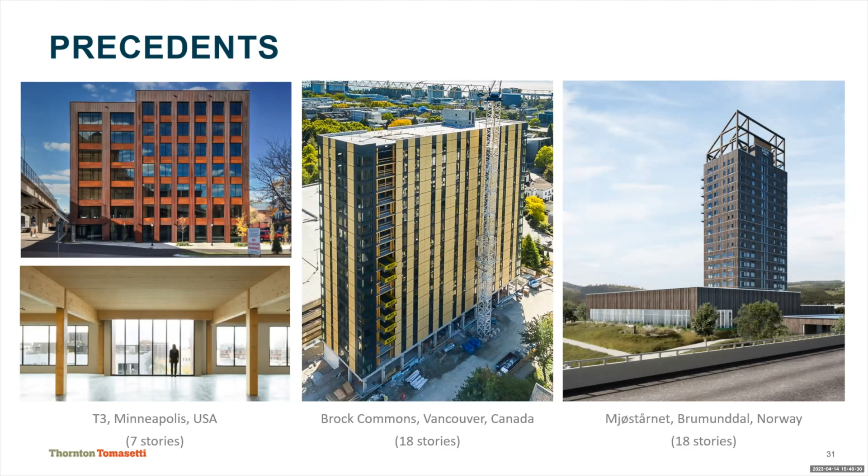For anyone that knows anything about permitting of structures, for type 1 and 2 structures, which if you're dealing with high rises and tall buildings, you're probably in type 1, there's some very clear language in the code that says you can't use combustible materials. So the question becomes, how did we get the authorities to approve a tall mass timber structure?

Here's some of the visual things we worked through with the city. When you're dealing with mass timber, you're likely in the type 3, 4, and 5 categories, which for an office and residential structure typically limits you to anywhere from 40 to 85 feet tall and roughly 5 to 6 stories. That's why Ascent, which may not seem tall to some, was significantly taller than what the code would allow under what I'll call prescriptive methods.

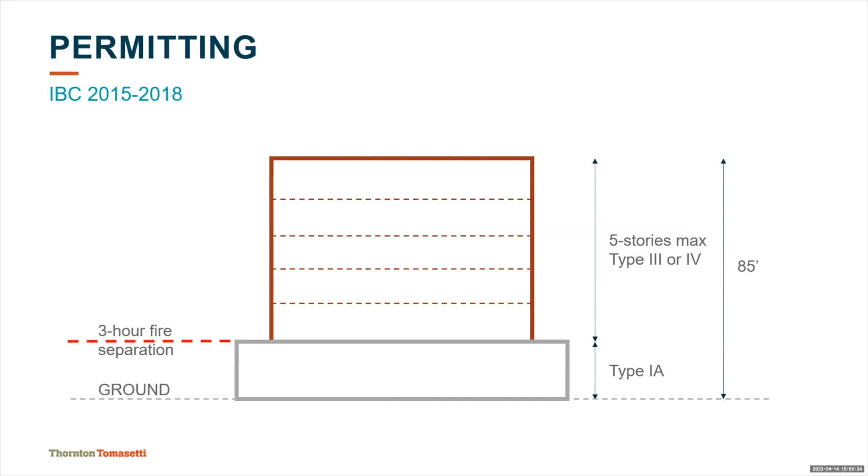One way around this is what people have long called podium construction. If you leave a 3-hour fire separation, you can utilize type 1A construction, which is likely your standard concrete construction, and then put the mass timber on top of that. Here's an example of a project TT did that took this approach, with a podium of concrete and then 5 stories of mass timber on top.

One interesting thing to look at is the growth of tall mass timber. The framework project I mentioned, which unfortunately lost some funding, was approved under a very similar process to what I'm about to describe. It was 12 stories tall, almost twice as tall as the previous tallest mass timber structure in the United States, back in 2017. So from 2015 to 2017 we doubled the height of a designed mass timber structure, but then from 2017 to 2020 we once again more than doubled that height with Ascent.

So you can see very rapidly, almost exponentially, the height of mass timber is growing, because it's not necessarily limited by engineering, but more by finances and logistics having to do with the mass timber.

For Ascent, what I mentioned is we use what's called the alternate materials provision, a concept that's in every code. What the code essentially says is that it's not there to limit any design in any way, shape, or form. All they want to do is give a prescriptive method. And if you're going to use what's called in the industry a performance-based design, your design needs to meet the general quality, performance, and safety measures of any other design using a prescriptive method.

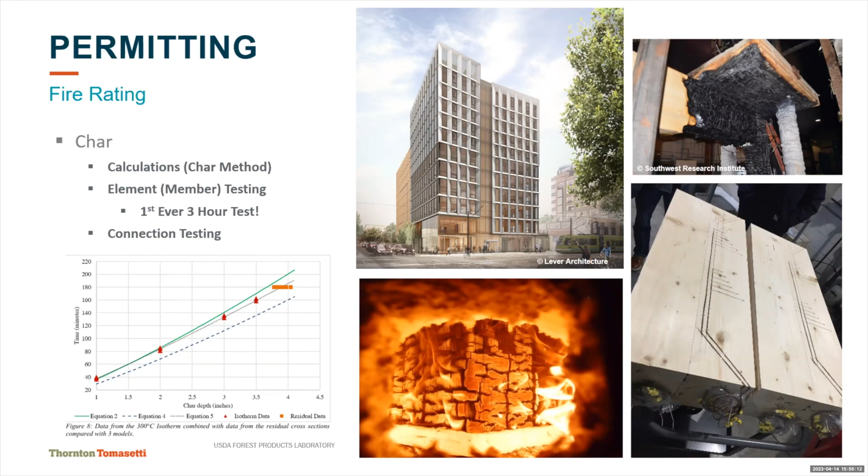The other thing you can do is actually test the connection itself. What you see in the upper right is testing not just the members, but how the connection and the assembly perform as a unit—you can load test it by doing that. That's something I'm sure you guys are very familiar with at U of I.

So there's a lot of different ways you could do it, and on Ascent we used all of them. For the beams, we used the NDS design provisions for the char method. For the columns, as I mentioned, we had to do additional testing—up to 3 hours—as well as our own calculations and engineering judgment. For products like the CLT panels we got from the manufacturer, they do their own testing. All their panels are tested in their laboratories and come with a certificate saying they've been tested for X hours of rating. For our 5-ply panels, it was confirmed they had previously been tested for a 2-hour fire rating. From an engineering standpoint we did our own calculations as well, but having the certificate is nice when dealing with the authorities having jurisdiction.

For the connections themselves, this was one of the trickier parts on Ascent. The reason we used what I call that framework connection was because of a project in Portland, Oregon. Unfortunately it didn't go through and they didn't construct it, but it was permitted and approved, and as part of that they got a federal grant and did their own research on a fire connection—because up until this point no connection had ever been rated for 2 hours. There wasn't a lot of tall mass timber, and normally those connections are only rated for 1 to maximum an hour and a half. But their project needed a 2-hour rating, so they developed this connection, which looks very familiar to what you saw on the Ascent project. It had been rated for 2 hours, which is why we used it on Ascent, and it was part of the variance process with the city, to verify that not just our members but the connections themselves had been verified for a 2-hour exposed condition rating.

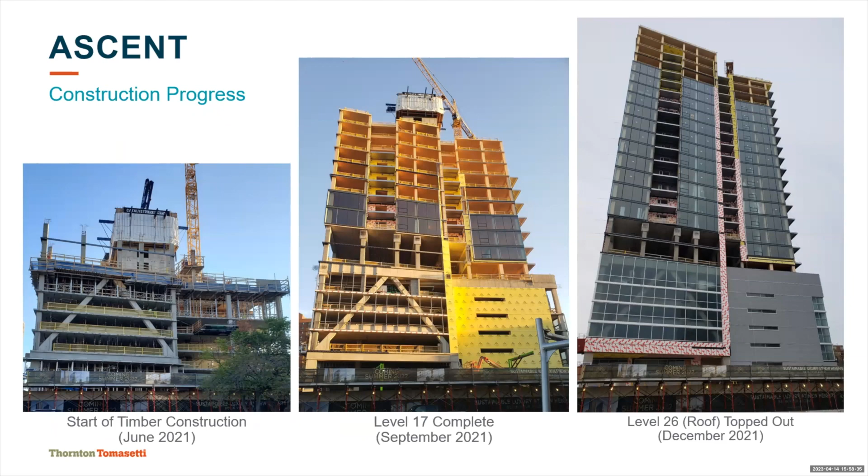So for construction, some photos here show the development of this structure - from early on when they're doing the concrete work, to actually constructing the mass timber floors, to the upper levels when they're nearing top out and putting on the facade.

And they would lift each of those panels with the crane, set them into place, and then move on to the next one. You can start to get an idea of how big some of these screws are, and how many hundreds or thousands of screws were utilized on this job, and the work this team put in to actually install all these panels.

One of the nice things with this system is once these panels are in place, your system is stable - your diaphragm has been set. We didn't count on the gypcrete topping for the diaphragm. So once this CLT was locked in and screwed into place, they could take the shoring out underneath the structure and get to work installing the mechanical, electrical, fire protection, plumbing - all those things could get in below the structure right away. Versus with a concrete structure, you may have levels of shoring that need to be left in place. So while it might take a little longer to construct the floor itself, you get earlier access to the floors below to begin finishing out the space.

Now talking about the different mass timber connectors you might see on the project. We had some column to column connections of two different types, whether or not they were exposed or concealed. There's the beam to column connections - we talked about a couple different ones of those. And then this idea of the connection from the core to the CLT and to the glulam beams.

As well as the simpler bearing connection - less material, less parts, less pieces. But this was only utilized where we were able to conceal it at the interior of the structure. You can see here some of these braces that they utilized, and how little bracing is actually required for a mass timber structure.

This is during construction. So once they put on that CLT slab at the top and once it's installed, they can remove these braces, bring them up to the next level, and start erecting all of the MEP elements on the floor below.

Again, you can see these frames or bents being installed in the field and the different parts and pieces. In this view below, you can see there's a little bit of water here. One of the key things with mass timber, no different from any other project, is this moisture mitigation. This was taken, and minutes later, all this water is squeegeed off, but it's critical between these elements, between these different prefabricated pieces.

So with the CLT panels, you can see that tape and there's a tar substance to make sure you don't have water infiltration between the different levels. But you can see in the upper left corner some of those prefabricated openings for mechanical routing or plumbing that came all the way from Europe, and were installed within, I believe they say, 1 millimeter or 2 tolerance.

To make sure that everything's properly coordinated when it gets to site, the other thing we've talked about is vertical compensation. As you can imagine, the CLT and mass timber move differently than the concrete cores, so we had to make sure we not only compensated for the mass timber columns themselves, but also understood how these things are going to move differently.

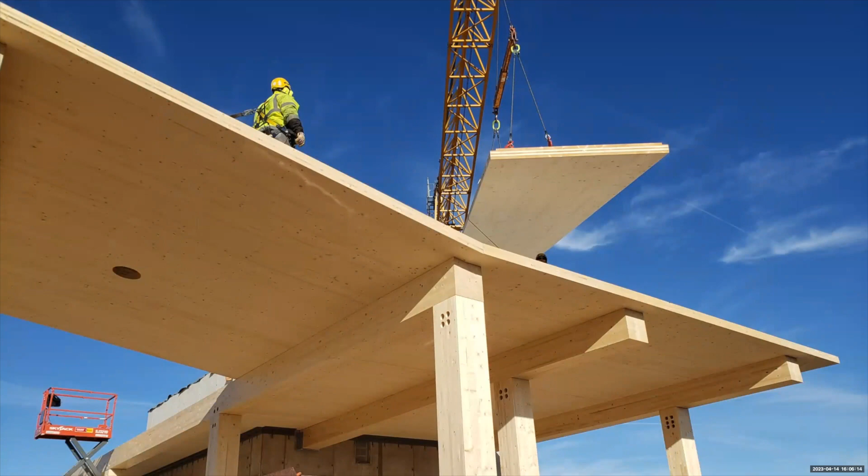This is the one level of the structure where we had a sloping roof, so you can see the different panels being brought in for these very last connections.

You can also see, at the top of the column, those holes were a unique column connection. Mass timber is so lightweight that we actually had to deal with uplift on these panels - making sure they didn't want to fly away from the structure. So we had to hold down the structure with additional, more robust connections, and due to the lightweight nature, in some cases this had to be done up to 3 floors until we got enough weight in the overall structure to prevent it from wanting to fly away.

Again, just another picture of these being installed, and then a few quick interior renderings of the finished space and what it looked like once Ascent was completed.

With just a couple minutes left, let's talk about the future of mass timber. With IBC 2021, there are new types of construction - type 4A, B, and C - allowing you to go up to 18 stories, versus only 6 stories in IBC 2015. The challenge though is even with 18 stories, you have to be fully concealed, so even if Ascent had been built under IBC 2021, you would have still required a variance to expose the structure and go beyond 18 stories.

One important thing to note is that middle type, 4B construction. With the new IBC 2024, which has been approved, it will allow you to expose 100% of the ceilings, which architecturally is a large benefit and something you're going to see a lot more of in the near future.

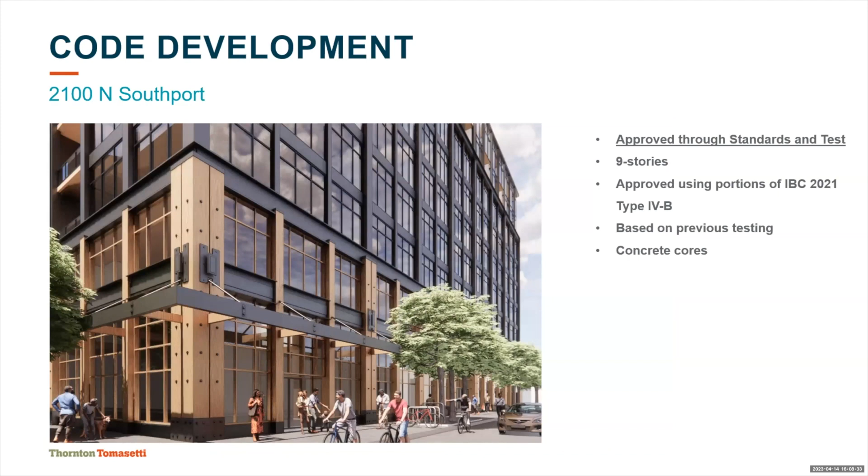For Chicago specifically - and again, this isn't the height of Ascent - there's a building approved through the Standards and Test Committee, proposed to be 9 stories tall, utilizing IBC 2021 and type 4B construction.

In terms of the actual engineering, one of the most common things people are looking at now is composite action - similar to a metal deck on a steel building, utilizing that metal deck and concrete engaging with steel beams. The idea here is engaging the CLT with the concrete topping that you're likely going to have on top for acoustics.

So whether it's nails or prefabricated systems, making sure that you can try to marry those two systems together. There's additional costs for all the connectors and logistical challenges for the contractor, but also you can get the benefit of the two behaving structurally.

You're also going to have a lot more testing, right? We had to use the framework test I mentioned because it was the only 2-hour test at the time. I know even since Ascent, there's at least 2 or 3 products that have been tested to 2 hours. The longer or the more often we use tall mass timber, the more products there's going to be, more benefits, more options for the design team, which should reduce the cost of all those members.

The last thing I'll talk about here is more of a hybrid structure idea, utilizing every material to the best of its ability. If you want column-free spans, steel is likely going to be one of the beneficial ways to go about that. This idea of merging steel beams with a CLT floor plate minimizes the overall floor-to-floor depth, still getting the beauty of exposing the CLT floor but getting some longer spans with the steel.

Or this is another project we're working on right now at TT, the hybrid idea of concrete and CLT. In this sense, using the CLT really as formwork, stay-in-place formwork, and then having these concrete beams that then support these CLT panels, panels crossing span to span.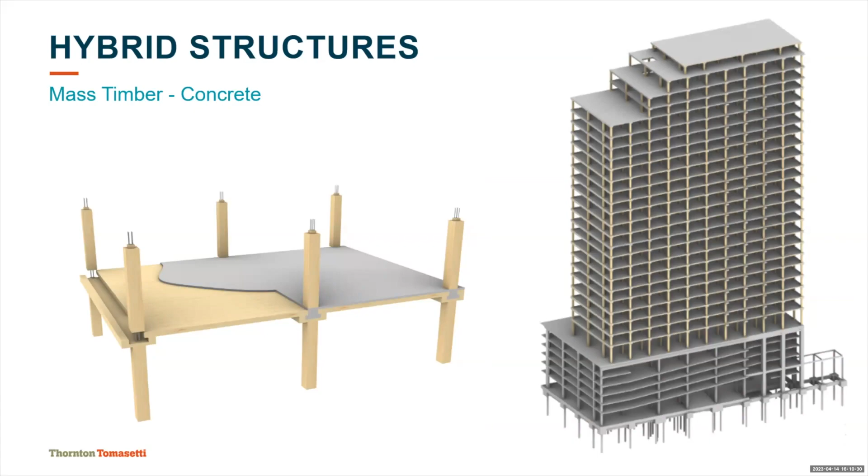Hopefully here, I think, apologies, maybe I ran a little long, so there's not a lot of time for questions, but I'm happy to take any that there are if we have time for. Thank you very much, Jordan. Really appreciate it. Wonderful. Excellent, excellent.

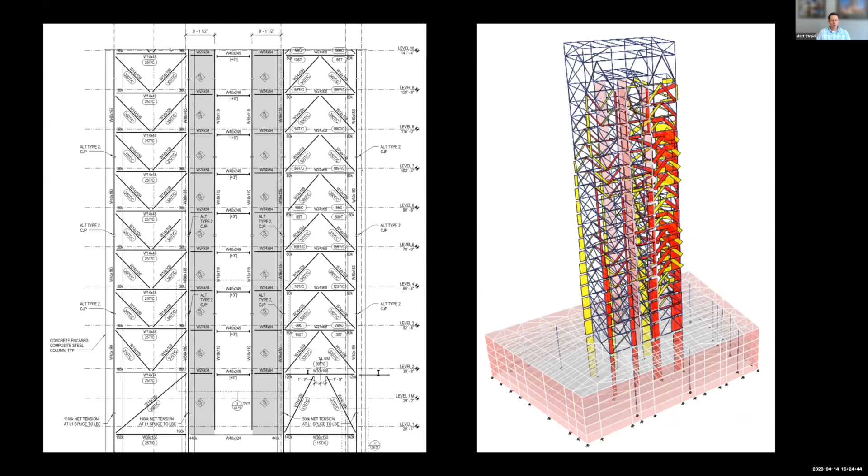And so to supplement that loss, we introduced this idea of a steel plate shear wall, and we also utilize composite columns. The vertical stiffness of the columns and the brace frame stiffness is very impactful on the building periods, and most importantly also the torsional period of the building.

So illustrating on plan, we've got these steel plate shear walls, and each of the core columns are the concrete encased steel columns.

This image is showing the erection of the steel plate shear wall. They're erected as two-story panels, right along with the traditional steel framing of having a two-story tier. This picture is a little deceiving because they shop installed the upper plate in each panel, and then the lower plate was left out in order to allow them to plumb the steel into place.

And then once everything was plumbed up, they installed the lower plates in each of these systems. So here you can kind of see that image looking down what will be the elevator lobbies one day, to give you that gap.

Quick introduction to that steel plate shear wall mechanics. We have these horizontal, vertical boundary elements. When you push it over, you have this tension field action, allowing the plate to buckle in one direction. This is modeled as a series of tension-only struts in our ETABS model.

Here's a good shout out to the U of I research. We know this because of experimental testing that was done right up north there at the Newmark lab. I think it's a cool picture when I started reading into this research, working on this project, to see those actual steel plates that look like sheets of linen, and you can really see that tension field action is very real.

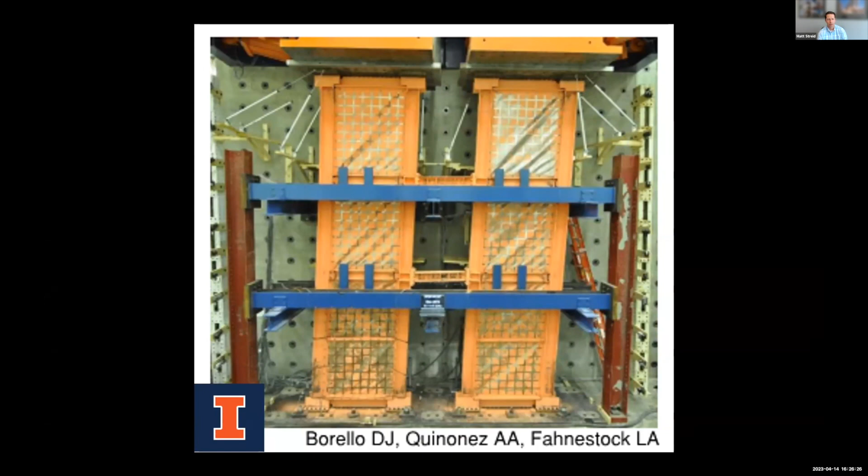So again, it's the application of that research that allows us to implement new ideas and innovations into our structures. So here we applied the data from that research to run a buckling analysis in a finite element model, noting that this building is a wind-controlled building and really stiffness controlled. These steel plate shear walls were not provided for strength as much as they were for stiffness.

So really our objective in this buckling analysis was to prove out that this buckling load, or the load that would cause this buckling, would never actually occur under an ultimate wind event, such that we didn't want to have any kind of topping. Even though it's not failing, we didn't want to have that plate buckling in any given wind event. And so we were able to prove out that we never reached that buckling load in these steel plates. As I mentioned, while steel has a great strength to it, we needed the area to get the stiffness that was required.

So this is the one, dig on steel, that I'll put in this presentation. In order to have comparable area to these steel columns with concrete, we would have needed 14 by 730s with 3-inch thick side plates, which would have added over 600 tons of steel to the project. So working with the contractor to come up with a solution to encase these in concrete to give us the stiffness saved well over $1 million for this solution.

This allowed us to proceed with the steel erection as the critical path, given that those concrete encasements are being provided for stiffness. They could proceed to erect and the concrete encasement operations could trail behind.

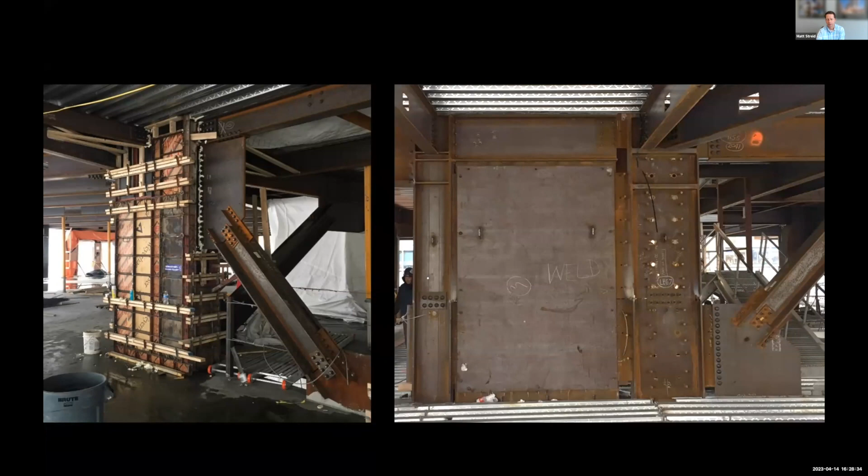And a few details here for how the rebar was detailed around the steel, and an image at the taller story. Note that we added stiffener plates because, given the size of those large plates, we did get into some buckling issues. So we had to stiffen those up.

And just a few other projects in the area where we were able to utilize our experiences at 145 Broadway to implement the same system, but refresh the detailing and work more closely with the fabricator again to evolve how that is going to be shop fabricated and erected by the contractor. And another project down the street that is also utilizing a similar concept with the continued evolution of our lessons learned.

So here I want to discuss how we can find more ways to implement material advances. We recognize that steel has a baseline, 50 KSI is what we've always used, but now we have the ability to use higher strength steel. So here we are starting to get taller with our Salesforce Tower, Chicago.

Some of the architecture students might have heard me present on this a few weeks ago down in Champaign. It's a 60-story building that's about to have its first tenants move in at the start of May. So we're excited about that.

But here I want to utilize this project to elaborate where we can find greater efficiencies with structural steel when we're controlled by strength, and what's the right application for that. Just a high level overview on the project: it's a traditional central concrete core with steel gravity framing that supports the slab on metal deck.

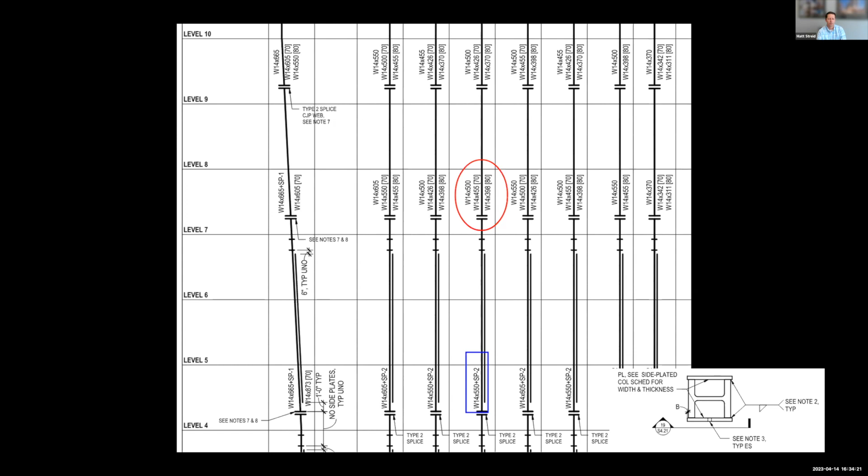Just another view of these 80-foot long columns coming down, touching the building ever so slightly. At the end of the day, they were too small because steel is so efficient that the architects actually wanted to clad them and make them a little bigger to feel more proportional with the building. So while we take advantage of the smaller footprint in the leasable space, that's a big benefit of steel columns we saw in Jim's presentation. When using concrete, there are great benefits, but you can also end up with fairly large sections that take up a lot of rentable space.

Another application of A913 steel is in areas with high axial loads, such as columns - we also have that in outriggers. As mentioned in earlier presentations, it's a great way to decrease the aspect ratio on a high-rise building like this, where our core is dictated by architectural constraints around the primary elevator shafts and our core-to-glass span. So we really want to widen that stance as best we can. We implemented these two-story outrigger trusses shown here in yellow, with belt trusses around the perimeter to help distribute loads around the outside of the building, and the top core of the truss with the same configuration.

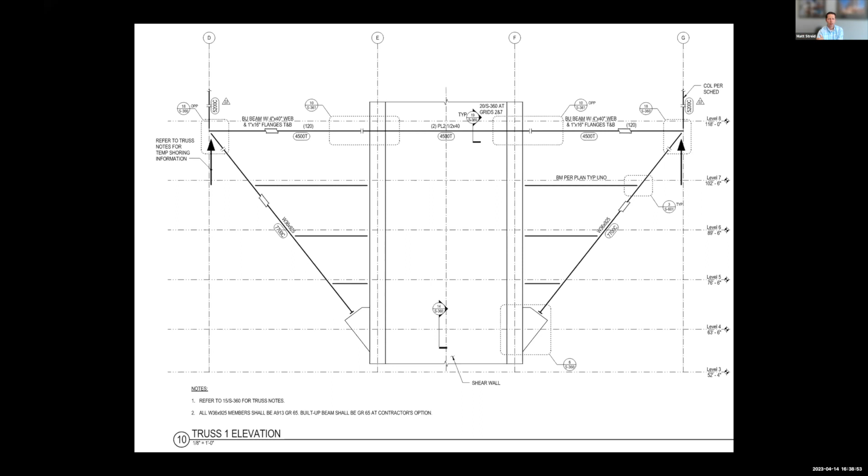But the resulting forces from these sloping columns—you've got tremendously large vertical loads from supporting a 60-story building, and then you're taking it at an angle—this actually required the largest available sections. They're not really column shapes, so we ended up using them as columns, W36 by 925s, also in grade 65 steel, utilizing that high grade steel to solve the constraint of these serious magnitude forces.

And then at the end of the end bays, where we're not at the core, we had to balance that load all with steel framing outside of the core. So you see this vertical truss to help resolve those unbalanced forces, and then also a horizontal truss.

Just noting on this sheet, as you see, not only do we have that 36 by 925, but they're back-to-back 925 grade 65 columns, where we've got these loads coming down, collecting 4 columns all into 2 points. Again, just some extraordinary forces that would only be resolved within a reasonable footprint with steel. It's the shot of the horizontal truss that is utilized to help drag that unbalanced force back to the concrete core. On the right-hand side, you can see that piggybacked W36 by 925 mega column.

And then one more project here in Chicago: Chicago Union Station, another central concrete core building with perimeter steel framing. There's Union Station.

The key feature of Union Station is this plaza, the interface at the ground plane where the columns come down. The architect Goettsch Partners wanted to touch the ground plane as minimally as possible with this expressive feature, which inherently attracted a lot of force. So another caveat to this A913 steel is that this project used, in lieu of those back-to-back 925 columns, built-up box columns and used tailor-made steel, which is an A913 plate material produced by ArcelorMittal that allows you to use that high-strength material in custom built-up shapes.

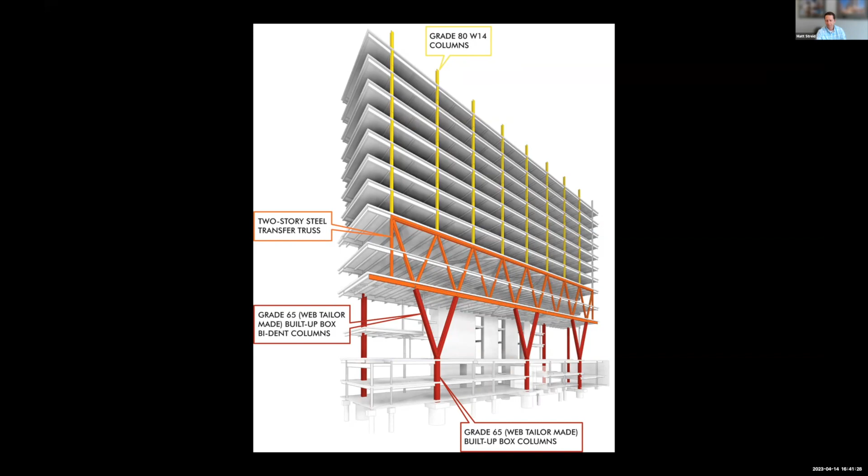Switching gears here quickly to the evolution of innovations. I trust many of you have hopefully seen the stories about Rainier Square. This was presented at the recent structural engineering conference by Dr. Varma of Purdue, who we've collaborated closely with. I won't go into the details on SpeedCore, but what I really want to focus on here is how to evolve that innovation.

The MK mantra is always strive for better. So when we create this new system, what can we learn from it and how can we evolve it over time? At a high level, if you haven't heard of it, we're trying to replace the idea of a traditional concrete leading core that takes a lot longer on the schedule to allow the concrete core to get ahead of the steel framing, given how fast the steel erectors can build up their framing.

It's this series of cross ties that make up the composite plate shear wall system—this panelized system of 2 steel plates sandwiched together, kind of like an ice cream sandwich, that allows these plate panels to be erected with the steel frame. So this core goes up as steel prefabricated panels that are shipped to site. Again, as discussed earlier in the symposium, the idea of modular construction—this is an evolution of how we modularize the construction of the lateral system in the core and allow that to go up faster.

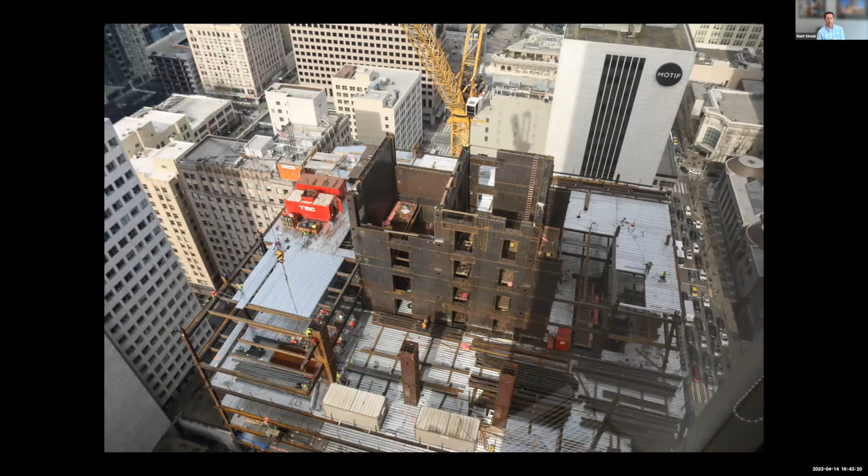So there was a lot of technical scrutiny that went into the design and the peer review of this tower. A lot of that data utilized in our design was produced by research at Purdue University, which allowed us to implement it into our analysis and work closely with peer reviewers in the city of Seattle to get this permitted. But given that the fireproofing research was still ongoing at the time of this project, one of the concessions at Rainier Tower was that we would spray cementitious fireproofing across the entire core, since we didn't yet have those research results. This is the first building ever to utilize this system, and it happens to be a 58-story building in a high seismic zone.

So that was something we accepted to help this project move forward. The next evolution in SpeedCore is, given the cost and schedule implications of spray-on fireproofing, how do we eliminate that? Our project 200 Park in San Jose is the next project that has implemented the SpeedCore system. It's only a 19-story building, but it's a step in the evolution of how we're implementing SpeedCore. There was a tremendous amount of lessons learned from an erection and fabrication standpoint, but from an analysis perspective, the evolution of the fire engineering was something implemented at 200 Park.

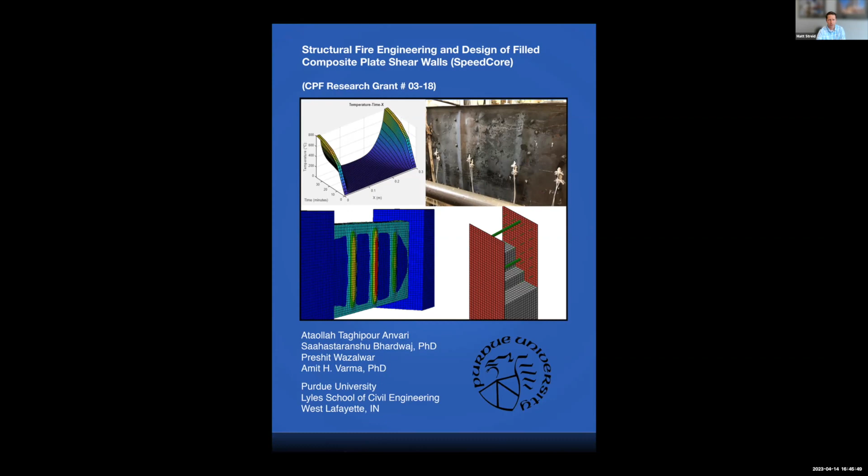Referencing fire packages helps us determine what type of heat to use in these time-dependent curves, allowing us to look at not only the axial capacity of these walls but also the splice connections and how these pieces are all put together. This is just a reference to a detailed plot we reviewed, of splice connection capacity relative to that fire case, based on formulas produced from the experimental data. This resulted in no fireproofing needed on the primary wall panels.

The next innovation in SpeedCore is recognizing that the first two uses of SpeedCore were in high seismic regions - Seattle and San Jose. We've now implemented this system on the East Coast in Boston, where we do have some seismic demands, but they do not control over the wind demands. This allowed us to look at what are the controlling demands on the splices, since we're not depending on the plates for ductility in high seismic applications - here we're wind controlled.

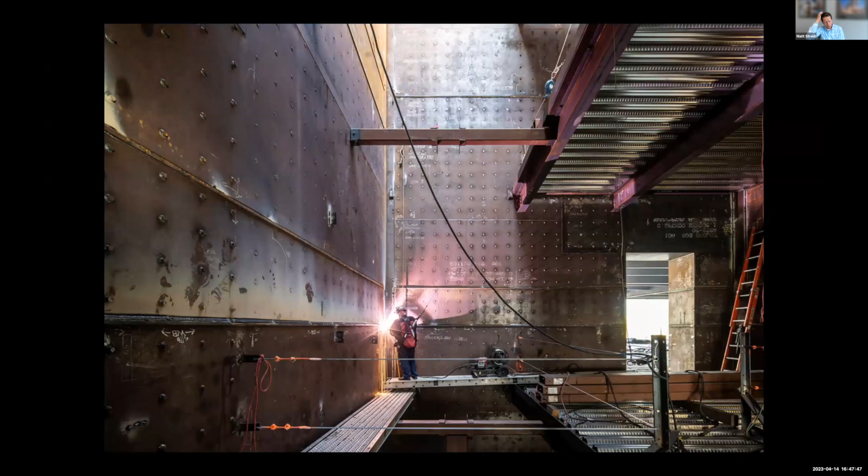One of the time-consuming efforts on SpeedCore is the welding of these splice plates - how you stack these panels together and make that splice, which in a seismic application required them to be fully welded for ductility. Now, this did not drive the overall duration of construction because it wasn't on the critical path - they're still erecting above this - but the labor involved in the miles of welding is something we want to improve, to get to a bolted connection instead. So we're looking at these typical horizontal and vertical splices between each panel and the boundary elements, finding ways to make this a bolted connection to eliminate all of that field welding.

But given that there's limited access or really no access to the inside of the panel, we've been brainstorming different concepts, more research with Purdue and also SUNY Buffalo about connection types, how we can get to a bolted connection. These have now been tested, whether we do a welded nut on the inside that allows you to bolt in from the outside only, or if you can imagine, we're having to fit all these ties, all these cross ties.

With no concrete in place, we cannot just continue to tighten those plates. So one proposal was to use a pipe sleeve, kind of a compression pipe that gives you something to tension those bolts against. And we also need to think about how that interfaces with erection. We've got these keeper plates.

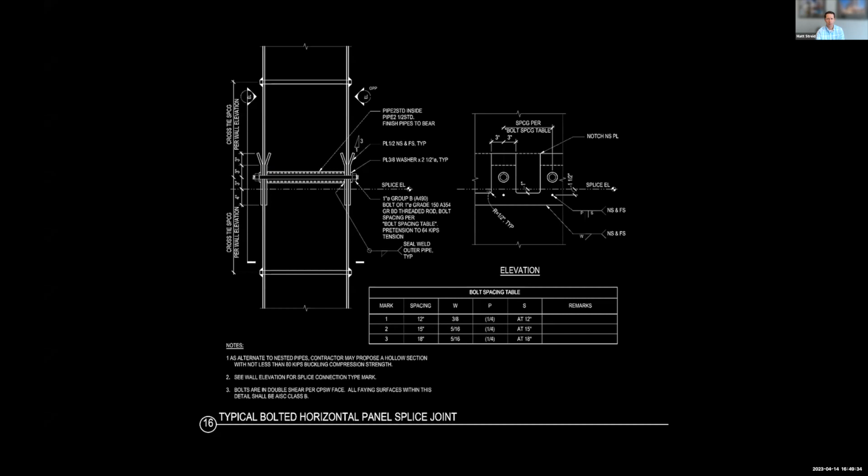So a lot of pieces at hand here that we've interacted a lot with the construction industry, with erectors, fabricators, and also utilizing the data that we've come across and finding ways—we don't want to be specifying something proprietary, but the concept of here's a series of options that a contractor could use.

Atlas Tube has produced the Shuriken nut keeper, where this is effectively tack welded in place on the inside of the wall that holds that nut in place, allowing you to thread that bolt in from the outside. We continue to get favorable results. Atlas has been very proactive in finding ways to progress the capacities, and they've now tested up to 1-inch diameter A490 bolts, which helps us significantly reduce the quantity of bolts required at these splice connections, but still giving that idea that we can have a non-proprietary solution with welded nuts, just giving the contractor some optionality.

And we take our ETABS model, still using shell elements, with some modification properties that we've applied based on the research data. Looking at any given pier, we can look at the forces—we've got our strain diagram from the overturning moment and axial loads in a pier that allow us to assess, based on that strain diagram, what are the forces in those bolts.

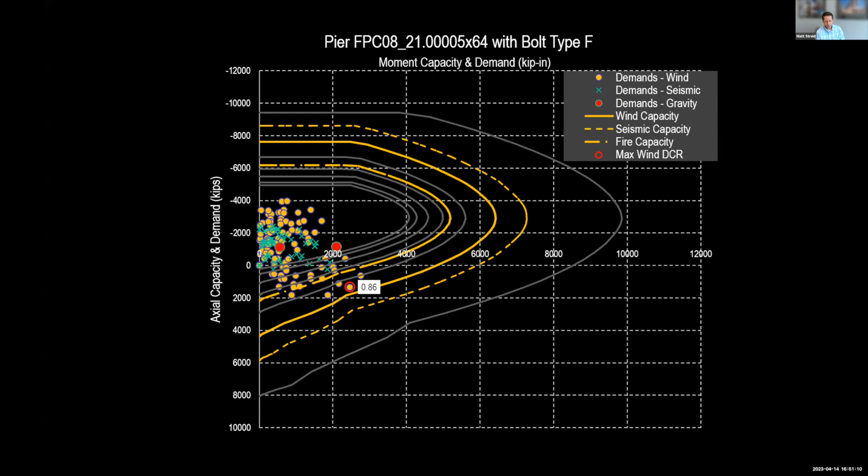Again, looking at that plot, we've got this capacity, and when we overlay all the data points of our wind, seismic, fire load cases, what is the bolt configuration that we need, where we can use lesser strength, smaller diameter bolts, fewer quantity bolts—that's all something that we want to progress.

And then just the real quick last point is to discuss the idea again of a modular system. So we've worked with AISC in their modular office study to again speed up the erection of these high-rise buildings with prefabrication. This effort with the fast floor system is supported by research at Northeastern University outside of Boston, run by Dr. Jerry Hajjar, former U of I professor, helping us research this system where we've got a prefabricated floor plate.

Concurrently, without the use of concrete, or attaching—like where we've got girders at the end bays—just different mechanisms, all kind of in the progress of being researched. So the idea of this plate...